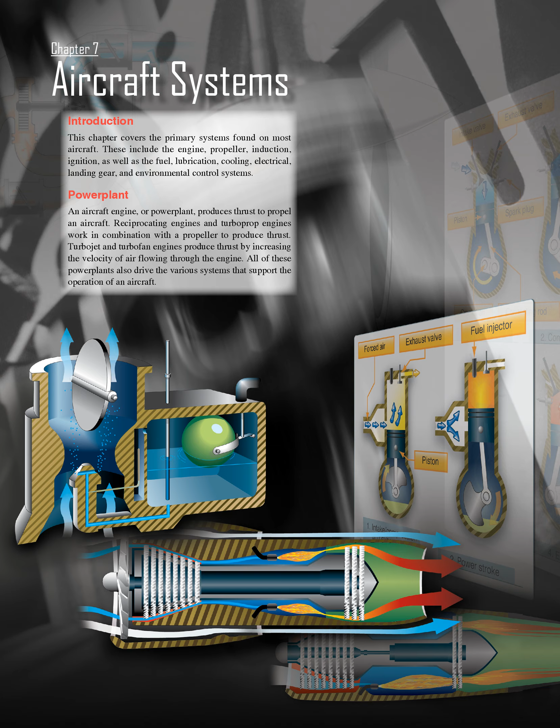Reciprocating engines. Most small aircraft are designed with reciprocating engines. The name is derived from the back and forth, or reciprocating, movement of the pistons that produces the mechanical energy necessary to accomplish work.

Driven by a revitalization of the general aviation industry and advances in both material and engine design, reciprocating engine technology has improved dramatically over the past two decades. The integration of computerized engine management systems has improved fuel efficiency, decreased emissions, and reduced pilot workload.

Reciprocating engines operate on the basic principle of converting chemical energy, fuel, into mechanical energy. This conversion occurs within the cylinders of the engine through the process of combustion. The two primary reciprocating engine designs are the spark ignition and the compression ignition.

The spark ignition reciprocating engine has served as the power plant of choice for many years. In an effort to reduce operating costs, simplify design, and improve reliability, several engine manufacturers are turning to compression ignition as a viable alternative. Often referred to as jet fuel piston engines, compression ignition engines have the added advantage of utilizing readily available and lower cost diesel or jet fuel.

The main mechanical components of the spark ignition and the compression ignition engine are essentially the same. Both use cylindrical combustion chambers and pistons that travel the length of the cylinders to convert linear motion into the rotary motion of the crankshaft.

The main difference between spark ignition and compression ignition is the process of igniting the fuel. Spark ignition engines use a spark plug to ignite a premixed fuel-air mixture. Fuel-air mixture is the ratio of the weight of fuel to the weight of air in the mixture to be burned.

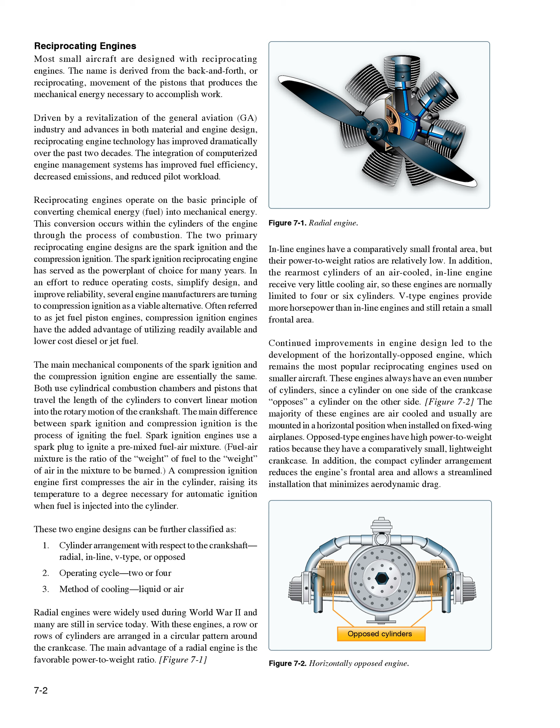Depending on the engine manufacturer, all of these arrangements can be designed to utilize spark or compression ignition and operate on either a two or four-stroke cycle.

In a two-stroke engine, the conversion of chemical energy into mechanical energy occurs over a two-stroke operating cycle. The intake, compression, power, and exhaust processes occur in only two strokes of the piston rather than the more common four strokes. Because a two-stroke engine has a power stroke upon each revolution of the crankshaft, it typically has a higher power-to-weight ratio than a comparable four-stroke engine.

Due to the inherent inefficiency and disproportionate emissions of the earliest designs, use of the two-stroke engine has been limited in aviation. Recent advances in material and engine design have reduced many of the negative characteristics associated with two-stroke engines. Modern two-stroke engines often use conventional oil sumps, oil pumps, and full-pressure-fed lubrication systems.

The use of direct fuel injection and pressurized air, characteristic of advanced compression ignition engines, make two-stroke compression ignition engines a viable alternative to the more common four-stroke spark ignition designs. Spark ignition four-stroke engines remain the most common design used in GA today.

The main parts of a spark ignition reciprocating engine include the cylinders, crankcase, and accessory housing. The intake/exhaust valves, spark plugs, and pistons are located in the cylinders. The crankshaft and connecting rods are located in the crankcase. The magnetos are normally located on the engine accessory housing.

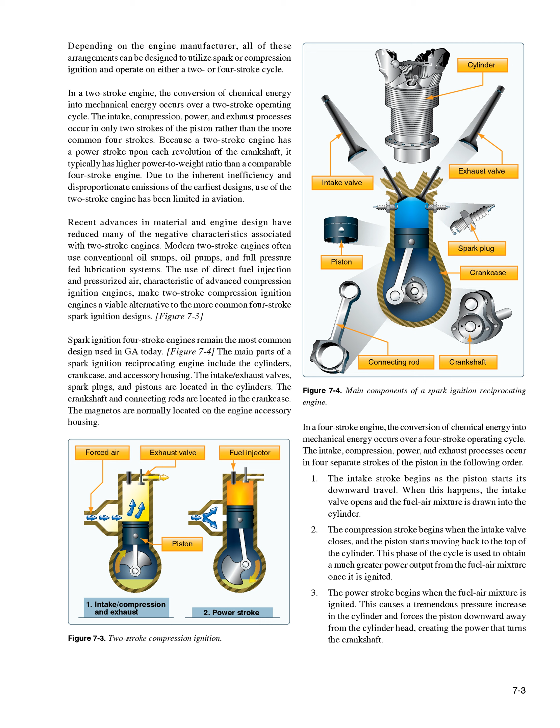Fourth, the exhaust stroke is used to purge the cylinder of burned gases. It begins when the exhaust valve opens, and the piston starts to move toward the cylinder head once again.

Even when the engine is operated at a fairly low speed, the four-stroke cycle takes place several hundred times each minute. In a four-cylinder engine, each cylinder operates on a different stroke. Continuous rotation of a crankshaft is maintained by the precise timing of the power strokes in each cylinder.

Continuous operation of the engine depends on the simultaneous function of auxiliary systems, including the induction, ignition, fuel, oil, cooling, and exhaust systems. The latest advance in aircraft reciprocating engines was pioneered in the mid-1960s by Frank Thielert, who looked to the automotive industry for answers on how to integrate diesel technology into an aircraft engine.

The advantage of a diesel-fueled reciprocating engine lies in the physical similarity of diesel and kerosene. Aircraft equipped with a diesel piston engine run on standard aviation kerosene, which provides more independence, higher reliability, lower consumption, and operational cost savings.

In 1999, Thielert formed Thielert Aircraft Engines, TAE, to design, develop, certify, and manufacture a brand new Jet-A-burning diesel cycle engine, also known as a jet-fueled piston engine, for the GA industry. By March 2001, the first prototype engine became the first certified diesel engine since World War II.

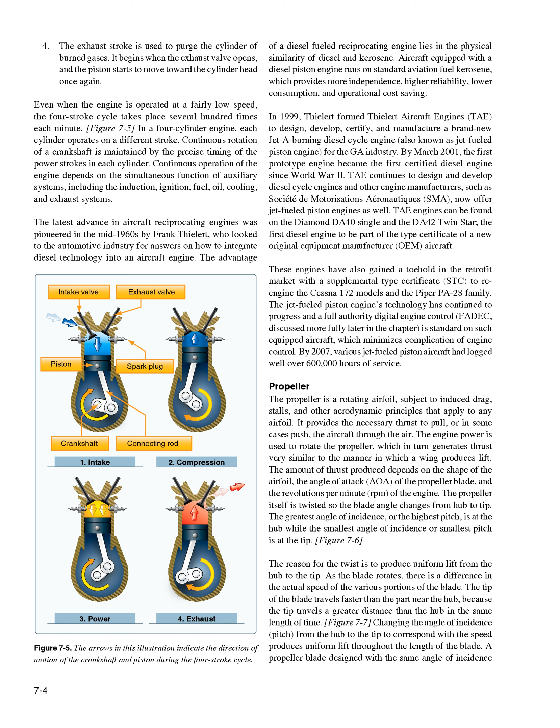A propeller blade designed with the same angle of incidence throughout its entire length would be inefficient, because as airspeed increases in flight, the portion near the hub would have a negative angle of attack while the blade tip would be stalled.

Small aircraft are equipped with either one of two types of propellers: fixed pitch or adjustable pitch. A propeller with fixed blade angles is a fixed pitch propeller. The pitch of this propeller is set by the manufacturer and cannot be changed.

Since a fixed pitch propeller achieves the best efficiency only at a given combination of airspeed and RPM, the pitch setting is ideal for neither cruise nor climb. Thus, the aircraft suffers a bit in each performance category. The fixed pitch propeller is used when low weight, simplicity, and low cost are needed.

There are two types of fixed pitch propellers: climb and cruise. Whether the airplane has a climb or cruise propeller installed depends upon its intended use. The climb propeller has a lower pitch, therefore less drag. Less drag results in higher RPM and more horsepower capability, which increases performance during takeoffs and climbs but decreases performance during cruising flight.

The cruise propeller has a higher pitch, therefore more drag. More drag results in lower RPM and less horsepower capability, which decreases performance during takeoffs and climbs but increases efficiency during cruising flight. The propeller is usually mounted on a shaft, which may be an extension of the engine crankshaft.

In this case, the RPM of the propeller would be the same as the crankshaft RPM. On some engines, the propeller is mounted on a shaft geared to the engine crankshaft. In this type, the RPM of the propeller is different than that of the engine.

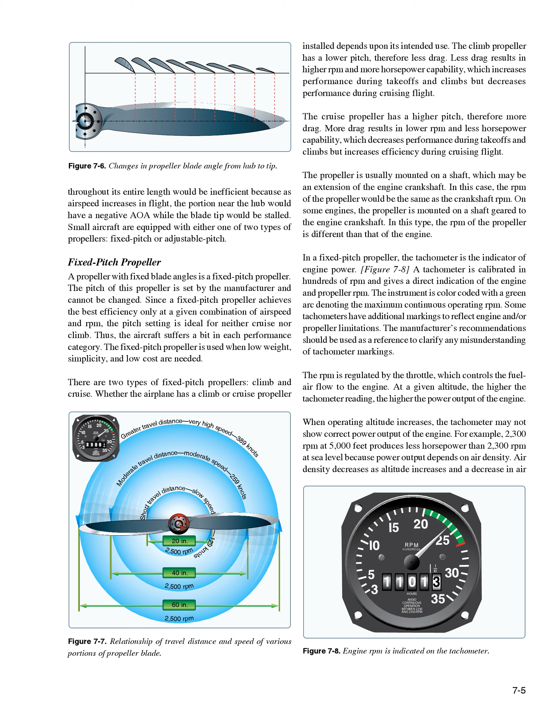When operating altitude increases, the tachometer may not show correct power output of the engine. For example, 2,300 revolutions per minute at 5,000 feet produces less horsepower than 2,300 revolutions per minute at sea level, because power output depends on air density. Air density decreases as altitude increases, and a decrease in air density, or higher density altitude, decreases the power output of the engine.

As altitude changes, the position of the throttle must be changed to maintain the same RPM. As altitude is increased, the throttle must be opened further to indicate the same RPM as at a lower altitude.

Adjustable pitch propeller. The adjustable pitch propeller was the forerunner of the constant speed propeller. It is a propeller with blades whose pitch can be adjusted on the ground with the engine not running, but which cannot be adjusted in flight. It is also referred to as a ground adjustable propeller.

By the 1930s, pioneer aviation inventors were laying the groundwork for automatic pitch change mechanisms, which is why the term sometimes refers to modern constant-speed propellers that are adjustable in flight. The first adjustable pitch propeller systems provided only two pitch settings, low and high. Today, most adjustable pitch propeller systems are capable of a range of pitch settings.

A constant-speed propeller is a controllable pitch propeller whose pitch is automatically varied in flight by a governor maintaining constant RPM despite varying air loads. It is the most common type of adjustable pitch propeller.

The main advantage of a constant-speed propeller is that it converts a high percentage of brake horsepower (bhp) into thrust horsepower (thp) over a wide range of RPM and airspeed combinations. A constant-speed propeller is more efficient than other propellers because it allows selection of the most efficient engine RPM for the given conditions.

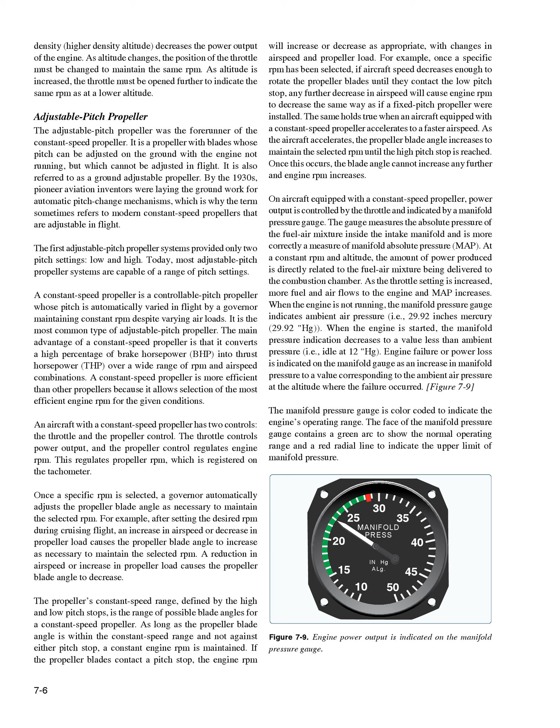For any given RPM, there is a manifold pressure that should not be exceeded. If manifold pressure is excessive for a given RPM, the pressure within the cylinders could be exceeded, placing undue stress on the cylinders. If repeated too frequently, this stress can weaken the cylinder components and eventually cause engine failure.

A pilot can avoid conditions that overstress the cylinders by being constantly aware of the RPM, especially when increasing the manifold pressure. Consult the manufacturer's recommendations for power settings of a particular engine to maintain the proper relationship between manifold pressure and RPM. When both manifold pressure and RPM need to be changed, avoid engine overstress by making power adjustments in the proper order.

When power settings are being decreased, reduce manifold pressure before reducing RPM. If RPM is reduced before manifold pressure, it automatically increases, possibly exceeding the manufacturer's tolerances. When power settings are being increased, reverse the order: increase RPM first, then manifold pressure.

To prevent damage to radial engines, minimize operating time at maximum RPM and manifold pressure, and avoid operation at maximum RPM and low manifold pressure. The engine and/or airframe manufacturer's recommendations should be followed to prevent severe wear, fatigue, and damage to high-performance reciprocating engines.

Propeller overspeed in piston engine aircraft. On March 17, 2010, the Federal Aviation Administration, FAA, issued Special Airworthiness Information Bulletin SAIB CE-10-21.

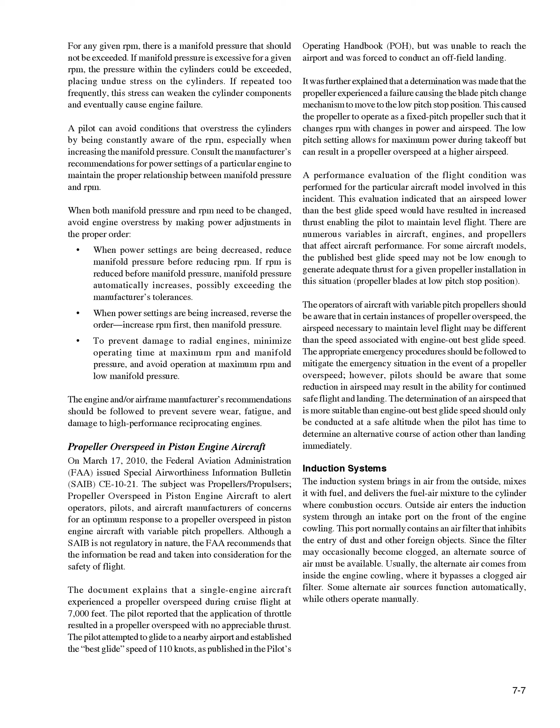Two types of induction systems are commonly used in small aircraft engines. First, the carburetor system mixes the fuel and air in the carburetor before this mixture enters the intake manifold. Second, the fuel injection system mixes the fuel and air immediately before entry into each cylinder, or injects fuel directly into each cylinder. Carburetor systems.

Aircraft carburetors are separated into two categories: float-type carburetors and pressure-type carburetors. Float-type carburetors, complete with idling, accelerating, mixture control, idle cutoff, and power enrichment systems, are the most common of the two carburetor types. Pressure-type carburetors are usually not found on small aircraft.

The basic difference between a float-type and a pressure-type carburetor is the delivery of fuel. The pressure-type carburetor delivers fuel under pressure by a fuel pump.

In the operation of the float-type carburetor system, the outside air first flows through an air filter, usually located at an air intake in the front part of the engine cowling. This filtered air flows into the carburetor and through a venturi, a narrow throat in the carburetor. When the air flows through the venturi, a low pressure area is created that forces the fuel to flow through a main fuel jet located at the throat.

The fuel then flows into the airstream where it is mixed with the flowing air. The fuel-air mixture is then drawn through the intake manifold and into the combustion chambers where it is ignited. The float-type carburetor acquires its name from a float that rests on fuel within the float chamber.

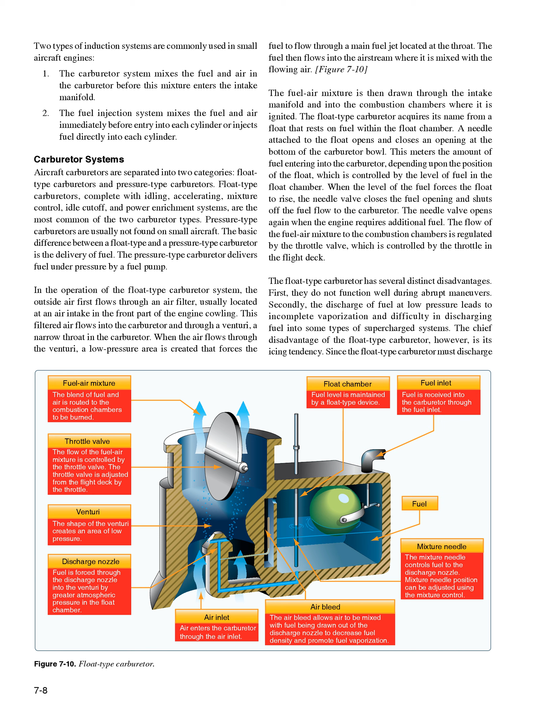The chief disadvantage of the float-type carburetor, however, is its icing tendency. Since the float-type carburetor must discharge fuel at a point of low pressure, the discharge nozzle must be located at the venturi throat, and the throttle valve must be on the engine side of the discharge nozzle. This means that the drop in temperature due to fuel vaporization takes place within the venturi. As a result, ice readily forms in the venturi and on the throttle valve.

A pressure-type carburetor discharges fuel into the airstream at a pressure well above atmospheric pressure. This results in better vaporization and permits the discharge of fuel into the airstream on the engine side of the throttle valve. With the discharge nozzle in this position, fuel vaporization takes place after the air has passed through the throttle valve, at a point where the drop in temperature is offset by heat from the engine. Thus, the danger of fuel vaporization icing is practically eliminated.

The effects of rapid maneuvers and rough air on the pressure-type carburetors are negligible, since their fuel chambers remain filled under all operating conditions.

Mixture control carburetors are normally calibrated at sea level air pressure, where the correct fuel-air mixture ratio is established with the mixture control set in the full rich position. However, as altitude increases, the density of air entering the carburetor decreases, while the density of the fuel remains the same. This creates a progressively richer mixture that can result in engine roughness and an appreciable loss of power.

The roughness normally is due to spark plug fouling from excessive carbon buildup on the plugs. Carbon buildup occurs because the rich mixture lowers the temperature inside the cylinder, inhibiting complete combustion of the fuel. This condition may occur during the run-up prior to takeoff at high elevation airports, and during climbs or cruise flight at high altitudes. To maintain the correct fuel-air mixture, the mixture must be leaned using the mixture control.

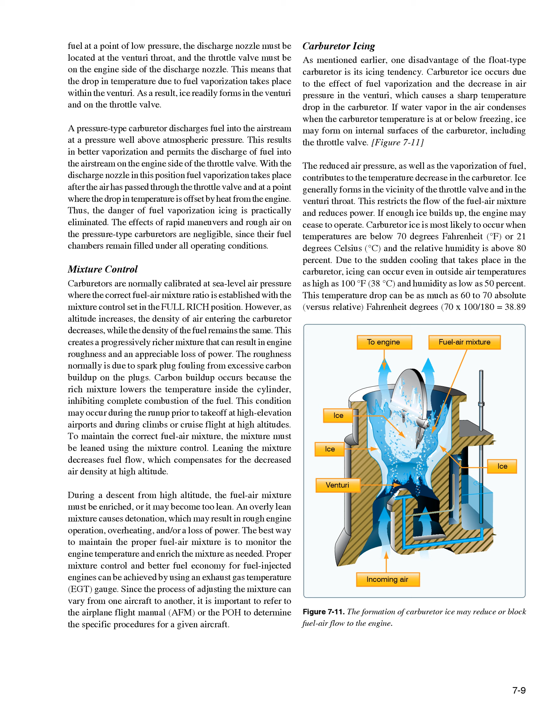This temperature drop can be as much as 60 to 70 absolute, versus relative, Fahrenheit degrees. Remember, there are 180 Fahrenheit degrees from freezing to boiling versus 100 degrees for the Celsius scale. Therefore, an outside air temperature of 100 F, 38 C, with a temperature drop of an absolute 70 F degrees, 38.89 Celsius degrees, results in an air temperature in the carburetor of 30 F, minus 1 C.

Figure 7.12: the first indication of carburetor icing in an aircraft with a fixed pitch propeller is a decrease in engine RPM, which may be followed by engine roughness. In an aircraft with a constant speed propeller, carburetor icing is usually indicated by a decrease in manifold pressure, but no reduction in RPM. Propeller pitch is automatically adjusted to compensate for loss of power. Thus, a constant RPM is maintained.

Although carburetor ice can occur during any phase of flight, it is particularly dangerous when using reduced power during a descent. Under certain conditions, carburetor ice could build unnoticed until power is added. To combat the effects of carburetor ice, engines with float-type carburetors employ a carburetor heat system.

Carburetor heat is an anti-icing system that preheats the air before it reaches the carburetor, and is intended to keep the fuel-air mixture above freezing to prevent the formation of carburetor ice. Carburetor heat can be used to melt ice that has already formed in the carburetor if the accumulation is not too great, but using carburetor heat as a preventative measure is the better option.

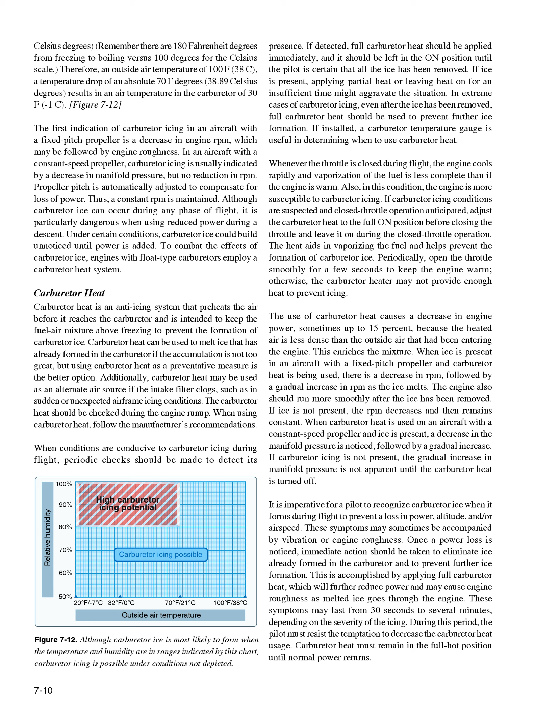Since the use of carburetor heat tends to reduce the output of the engine and to increase the operating temperature, carburetor heat should not be used when full power is required, as during takeoff, or during normal engine operation, except to check for the presence of, or to remove, carburetor ice.

Carburetor air temperature gauge. Some aircraft are equipped with a carburetor air temperature gauge, which is useful in detecting potential icing conditions. Usually, the face of the gauge is calibrated in degrees Celsius with a yellow arc indicating the carburetor air temperatures where icing may occur. This yellow arc typically ranges between -15 degrees Celsius and +5 degrees Celsius, 5 degrees Fahrenheit and 41 degrees Fahrenheit.

If the air temperature and moisture content of the air are such that carburetor icing is improbable, the engine can be operated with the indicator in the yellow range with no adverse effects.

If the atmospheric conditions are conducive to carburetor icing, the indicator must be kept outside the yellow arc by application of carburetor heat. Certain carburetor air temperature gauges have a red radial that indicates the maximum permissible carburetor inlet air temperature recommended by the engine manufacturer. If present, a green arc indicates the normal operating range.

Outside air temperature gauge: most aircraft are also equipped with an outside air temperature (OAT) gauge calibrated in both degrees Celsius and Fahrenheit. It provides the outside or ambient air temperature for calculating true airspeed and is useful in detecting potential icing conditions.

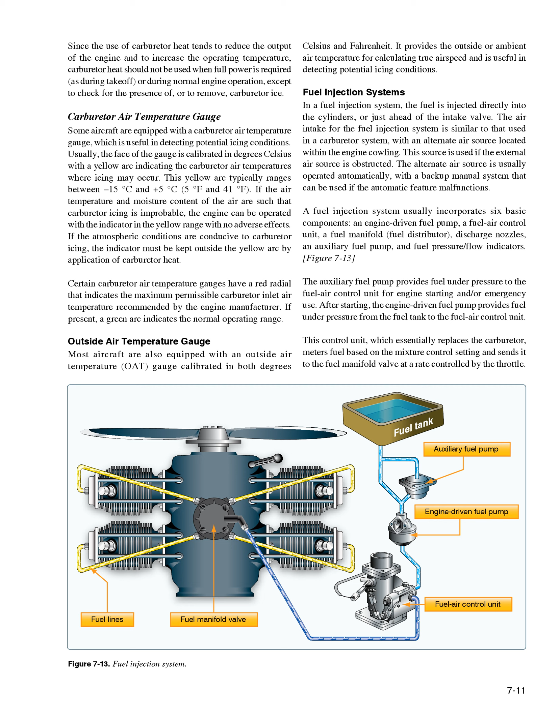It meters fuel based on the mixture control setting and sends it to the fuel manifold valve at a rate controlled by the throttle. After reaching the fuel manifold valve, the fuel is distributed to the individual fuel discharge nozzles. The discharge nozzles, located in each cylinder head, inject the fuel-air mixture directly into each cylinder intake port.

A fuel injection system is considered to be less susceptible to icing than a carburetor system, but impact icing on the air intake is a possibility in either system. Impact icing occurs when ice forms on the exterior of the aircraft and blocks openings, such as the air intake for the injection system. The following are advantages of using fuel injection: reduction in evaporative icing, better fuel flow, faster

throttle response, precise control of mixture, better fuel distribution, easier cold weather starts. The following are disadvantages of using fuel injection: difficulty in starting a hot engine, vapor locks during ground operations on hot days, and problems associated with restarting an engine that quits because of fuel starvation.

Superchargers and turbo superchargers increase an engine's horsepower. Manufacturers have developed forced induction systems called supercharger and turbo supercharger systems. They both compress the intake air to increase its density. The key difference lies in the power supply: a supercharger relies on an engine-driven air pump or compressor, while a turbocharger gets its power from the exhaust stream that runs through a turbine, which in turn spins the compressor.

Aircraft with these systems have a manifold pressure gauge, which displays manifold pressure within the engine's intake manifold. On a standard day at sea level with the engine shut down, the manifold pressure gauge indicates the ambient absolute air pressure of 29.92 inches Hg. Because atmospheric pressure decreases approximately 1 inch Hg per 1,000 feet of altitude increase, the manifold pressure gauge indicates approximately 24.92 inches Hg at an airport that is 5,000 feet above sea level with standard day conditions.

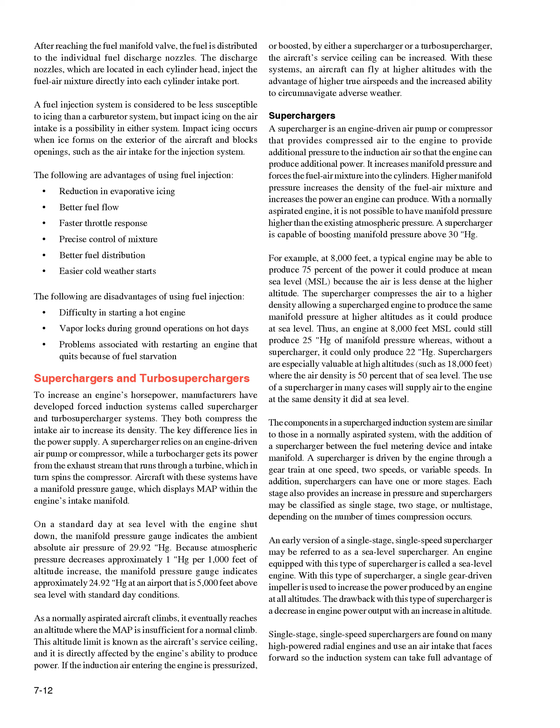Single-stage, single-speed superchargers are found on many high-powered radial engines and use an air intake that faces forward so the induction system can take full advantage of the ram air.

Intake air passes through ducts to a carburetor, where fuel is metered in proportion to the airflow. The fuel-air charge is then ducted to the supercharger, or blower impeller, which accelerates the fuel-air mixture outward. Once accelerated, the fuel-air mixture passes through a diffuser, where air velocity is traded for pressure energy. After compression, the resulting high-pressure fuel-air mixture is directed to the cylinders.

Some of the large radial engines developed during World War II have a single-stage, two-speed supercharger. With this type of supercharger, a single impeller may be operated at 2 speeds. The low impeller speed is often referred to as the low blower setting, while the high impeller speed is called the high blower setting. On engines equipped with a 2-speed supercharger, a lever or switch in the flight deck activates an oil-operated clutch that switches from one speed to the other.

Under normal operations, takeoff is made with the supercharger in the low blower position. In this mode, the engine performs as a ground-boosted engine, and the power output decreases as the aircraft gains altitude. However, once the aircraft reaches a specified altitude, a power reduction is made, and the supercharger control is switched to the high blower position. The throttle is then reset to the desired manifold pressure. An engine equipped with this type of supercharger is called an altitude engine.

Figure 7.14, turbo superchargers. The most efficient method of increasing horsepower in an engine is by using a turbo supercharger or turbocharger. Installed on an engine, this booster uses the engine's exhaust gases to drive an air compressor to increase the pressure of the air going into the engine through the carburetor or fuel injection system to boost power at higher altitude. The major disadvantage of the gear-driven supercharger—use of a large amount of the engine's power output for the amount of power increase produced—is avoided with a turbocharger because turbochargers are powered by an engine's exhaust gases.

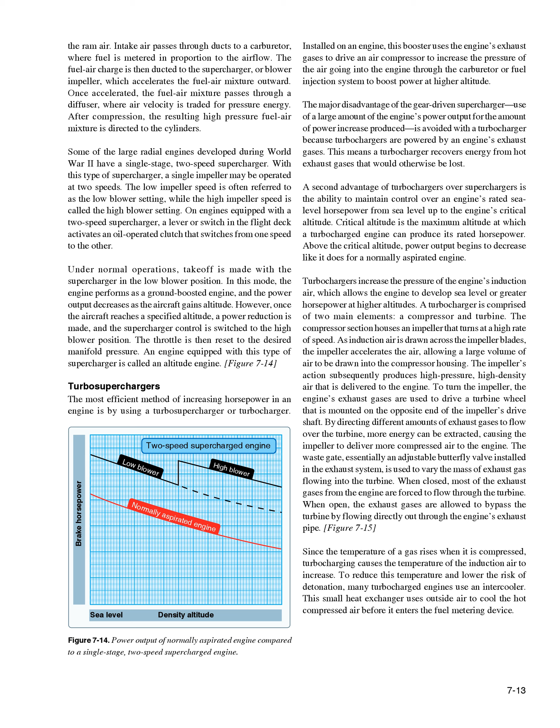This small heat exchanger uses outside air to cool the hot compressed air before it enters the fuel metering device.

System operation: on most modern turbocharged engines, the position of the wastegate is governed by a pressure-sensing control mechanism coupled to an actuator. Engine oil directed into or away from this actuator moves the wastegate position.

On these systems, the actuator is automatically positioned to produce the desired manifold pressure simply by changing the position of the throttle control. Other turbocharging system designs use a separate manual control to position the wastegate.

With manual control, the manifold pressure gauge must be closely monitored to determine when the desired manifold pressure has been achieved. Manual systems are often found on aircraft that have been modified with aftermarket turbocharging systems.

These systems require special operating considerations. For example, if the wastegate is left closed after descending from a high altitude, it is possible to produce a manifold pressure that exceeds the engine's limitations.

This condition, called an overboost, may produce severe detonation because of the leaning effect resulting from increased air density during descent. Although an automatic wastegate system is less likely to experience an overboost condition, it can still occur.

If takeoff power is applied while the engine oil temperature is below its normal operating range, the cold oil may not flow out of the wastegate actuator quickly enough to prevent an overboost. To help prevent overboosting, advance the throttle cautiously to prevent exceeding the maximum manifold pressure limits.

A pilot flying an aircraft with a turbocharger should be aware of system limitations. For example, a turbocharger turbine and impeller can operate at rotational speeds in excess of 80,000 revolutions per minute while at extremely high temperatures.

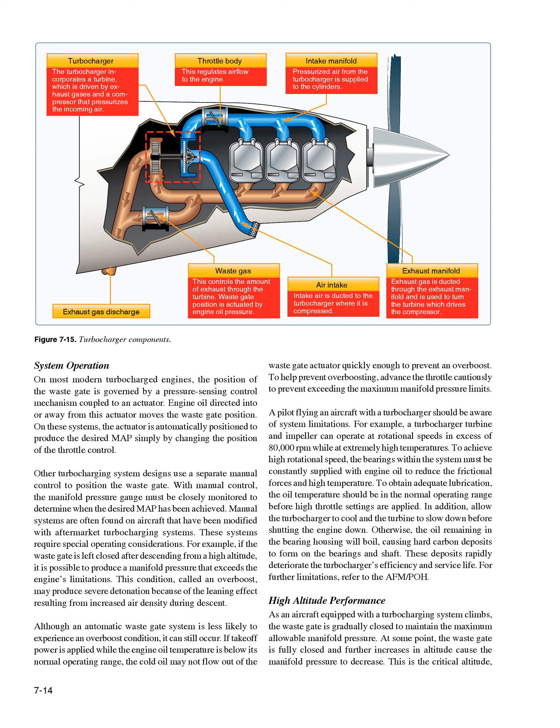The critical altitude is established by the aircraft or engine manufacturer. When evaluating the performance of the turbocharging system, be aware that if the manifold pressure begins decreasing before the specified critical altitude, the engine and turbocharging system should be inspected by a qualified aviation maintenance technician, AMT, to verify that the system is operating properly.

Ignition system: in a spark ignition engine, the ignition system provides a spark that ignites the fuel-air mixture in the cylinders, and is made up of magnetos, spark plugs, high-tension leads, and an ignition switch. A magneto uses a permanent magnet to generate an electrical current completely independent of the aircraft's electrical system.

The magneto generates sufficiently high voltage to jump a spark across the spark plug gap in each cylinder. The system begins to fire when the starter is engaged and the crankshaft begins to turn, and continues to operate whenever the crankshaft is rotating. Most standard certificated aircraft incorporate a dual ignition system with two individual magnetos, separate sets of wires, and spark plugs to increase reliability of the ignition system. Each magneto operates independently to fire one of the two spark plugs in each cylinder.

The firing of two spark plugs improves combustion of the fuel-air mixture and results in a slightly higher power output. If one of the magnetos fails, the other is unaffected, and the engine continues to operate normally, although a slight decrease in engine power can be expected. The same is true if one of the two spark plugs in a cylinder fails.

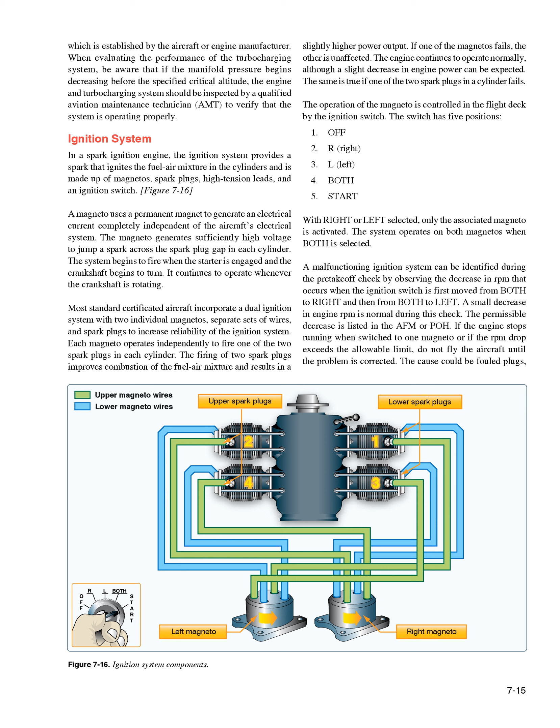If the engine stops running when switched to one magneto, or if the RPM drop exceeds the allowable limit, do not fly the aircraft until the problem is corrected. The cause could be fouled plugs, broken or shorted wires between the magneto and the plugs, or improperly timed firing of the plugs. It should be noted that no drop in RPM is not normal, and in that instance, the aircraft should not be flown. Following engine shutdown, turn the ignition switch to the off position.

Even with the battery and master switches off, the engine can fire and turn over if the ignition switch is left on and the propeller is moved, because the magneto requires no outside source of electrical power. Be aware of the potential for serious injury in this situation.

Even with the ignition switch in the off position, if the ground wire between the magneto and the ignition switch becomes disconnected or broken, the engine could accidentally start if the propeller is moved with residual fuel in the cylinder. If this occurs, the only way to stop the engine is to move the mixture lever to the idle cutoff position, then have the system checked by a qualified AMT.

Oil systems. The engine oil system performs several important functions: lubrication of the engine's moving parts, cooling of the engine by reducing friction, removing heat from the cylinders, providing a seal between the cylinder walls and pistons, and carrying away contaminants.

Reciprocating engines use either a wet sump or a dry sump oil system. In a wet sump system, the oil is located in a sump that is an integral part of the engine. In a dry sump system, the oil is contained in a separate tank and circulated through the engine by pumps.

Figure 7-17: the main component of a wet sump system is the oil pump, which draws oil from the sump and routes it to the engine. After the oil passes through the engine, it returns to the sump. In some engines, additional lubrication is supplied by the rotating crankshaft, which splashes oil onto portions of the engine.

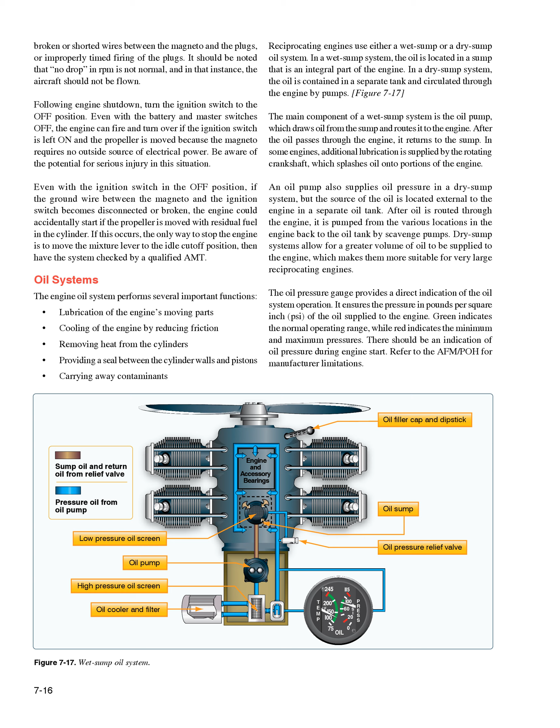The oil temperature gauge measures the temperature of the oil. A green area shows the normal operating range, and the red line indicates the maximum allowable temperature. Unlike oil pressure, changes in oil temperature occur more slowly. This is particularly noticeable after starting a cold engine, when it may take several minutes or longer for the gauge to show any increase in oil temperature.

Check oil temperature periodically during flight, especially when operating in high or low ambient air temperature. High oil temperature indications may signal a plugged oil line, a low oil quantity, a blocked oil cooler, or a defective temperature gauge. Low oil temperature indications may signal improper oil viscosity during cold weather operations. The oil filler cap and dipstick, for measuring the oil quantity, are usually accessible through a panel in the engine cowling.

If the quantity does not meet the manufacturer's recommended operating levels, oil should be added. The AFM/POH or placards near the access panel provide information about the correct oil type and weight, as well as the minimum and maximum oil quantity.

Engine cooling systems. The burning fuel within the cylinders produces intense heat, most of which is expelled through the exhaust system. Much of the remaining heat, however, must be removed, or at least dissipated, to prevent the engine from overheating. Otherwise, the extremely high engine temperatures can lead to loss of power, excessive oil consumption, detonation, and serious engine damage.

While the oil system is vital to the internal cooling of the engine, an additional method of cooling is necessary for the engine's external surface. Most small aircraft are air-cooled, although some are liquid-cooled. Air cooling is accomplished by air flowing into the engine compartment through openings in front of the engine cowling. Baffles route this air over fins attached to the engine cylinders and other parts of the engine, where the air absorbs the engine heat. Expulsion of the hot air takes place through one or more openings in the lower, aft portion of the engine cowling.

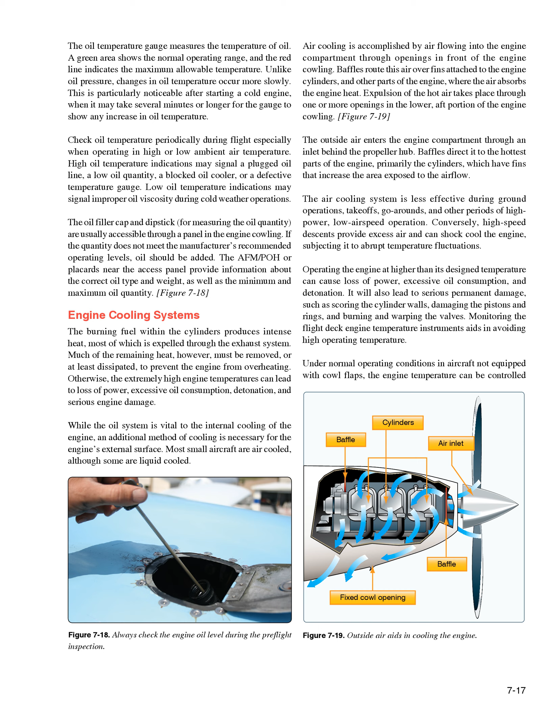Monitoring the flight deck engine temperature instruments aids in avoiding high operating temperature. Under normal operating conditions in aircraft not equipped with cowl flaps, the engine temperature can be controlled by changing the airspeed or the power output of the engine. High engine temperatures can be decreased by increasing the airspeed and/or reducing the power.

The oil temperature gauge gives an indirect and delayed indication of rising engine temperature, but can be used for determining engine temperature if this is the only means available. Most aircraft are equipped with a cylinder head temperature gauge that indicates a direct and immediate cylinder temperature change. This instrument is calibrated in degrees Celsius or Fahrenheit and is usually color-coded with a green arc to indicate the normal operating range. A red line on the instrument indicates maximum allowable cylinder head temperature.

To avoid excessive cylinder head temperatures, increase airspeed, enrich the fuel-air mixture, and/or reduce power. Any of these procedures help to reduce the engine temperature. On aircraft equipped with cowl flaps, use the cowl flap positions to control the temperature.

Cowl flaps are hinged covers that fit over the opening through which the hot air is expelled. If the engine temperature is low, the cowl flaps can be closed, thereby restricting the flow of expelled hot air and increasing engine temperature. If the engine temperature is high, the cowl flaps can be opened to permit a greater flow of air through the system, thereby decreasing the engine temperature.

Exhaust systems. Engine exhaust systems vent the burned combustion gases overboard, provide heat for the cabin, and defrost the windscreen. An exhaust system has exhaust piping attached to the cylinders, as well as a muffler and a muffler shroud. The exhaust gases are pushed out of the cylinder through the exhaust valve and then through the exhaust pipe system to the atmosphere.

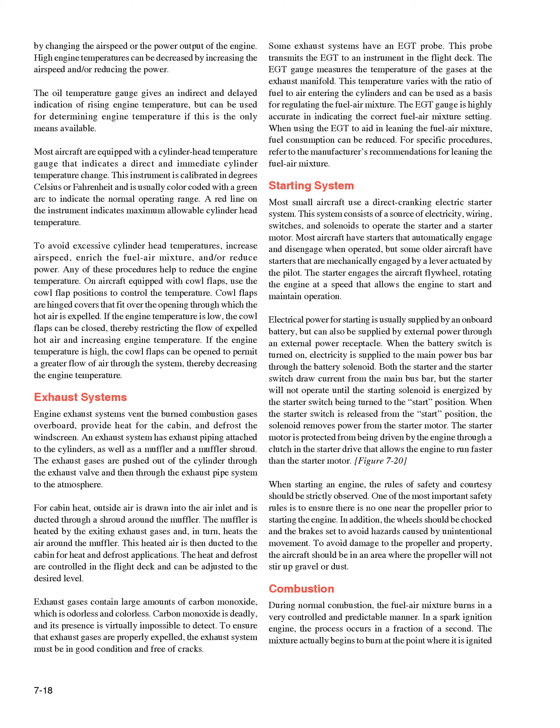The mixture actually begins to burn at the point where it is ignited by the spark plugs. It then burns away from the plugs until it is completely consumed.

This type of combustion causes a smooth buildup of temperature and pressure and ensures that the expanding gases deliver the maximum force to the piston at exactly the right time in the power stroke.

Figure 7-21. Detonation is an uncontrolled, explosive ignition of the fuel-air mixture within the cylinder's combustion chamber. It causes excessive temperatures and pressures which, if not corrected, can quickly lead to failure of the piston, cylinder, or valves. In less severe cases, detonation causes engine overheating, roughness, or loss of power.

Detonation is characterized by high cylinder head temperatures and is most likely to occur when operating at high power settings.

Common operational causes of detonation are use of a lower fuel grade than that specified by the aircraft manufacturer, operation of the engine with extremely high manifold pressures in conjunction with low RPM, operation of the engine at high power settings with an excessively lean mixture, and maintaining extended ground operations or steep climbs in which cylinder cooling is reduced.

Detonation may be avoided by following these basic guidelines during the various phases of ground and flight operations. Ensure that the proper grade of fuel is used. Keep the cowl flaps, if available, in the full open position while on the ground to provide the maximum airflow through the cowling.

Use an enriched fuel mixture, as well as a shallow climb angle, to increase cylinder cooling during takeoff and initial climb. Avoid extended, high-power, steep climbs.

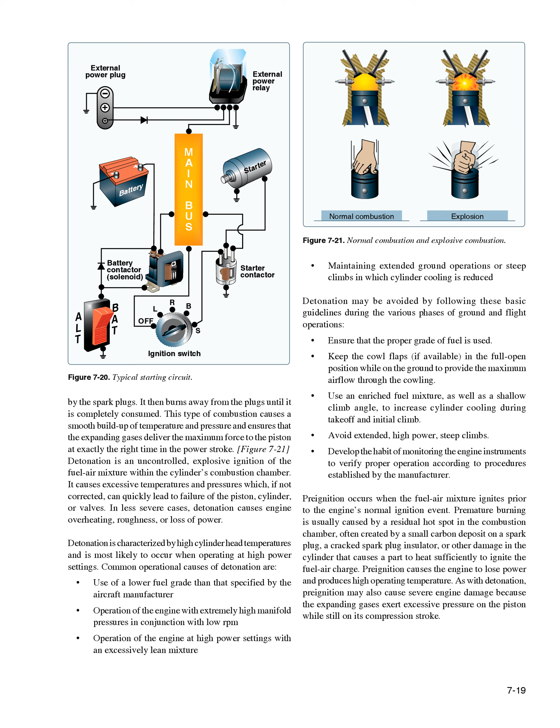Detonation and pre-ignition often occur simultaneously and one may cause the other. Since either condition causes high engine temperature accompanied by a decrease in engine performance, it is often difficult to distinguish between the two. Using the recommended grade of fuel and operating the engine within its proper temperature, pressure, and RPM ranges reduce the chance of detonation or pre-ignition.

Full Authority Digital Engine Control, or FADEC, is a system consisting of a digital computer and ancillary components that control an aircraft's engine and propeller. First used in turbine-powered aircraft, and referred to as Full Authority Digital Electronic Control, these sophisticated control systems are increasingly being used in piston-powered aircraft.

In a spark ignition reciprocating engine, the FADEC uses speed, temperature, and pressure sensors to monitor the status of each cylinder. A digital computer calculates the ideal pulse for each injector and adjusts ignition timing as necessary to achieve optimal performance. In a compression ignition engine, the FADEC operates similarly and performs all of the same functions, excluding those specifically related to the spark ignition process.

FADEC systems eliminate the need for magnetos, carburetor heat, mixture controls, and engine priming. A single throttle lever is characteristic of an aircraft equipped with a FADEC system. The pilot simply positions the throttle lever to a desired detent such as start, idle, cruise power, or max power, and the FADEC system adjusts the engine and propeller automatically for the mode selected. There is no need for the pilot to monitor or control the fuel-air mixture.

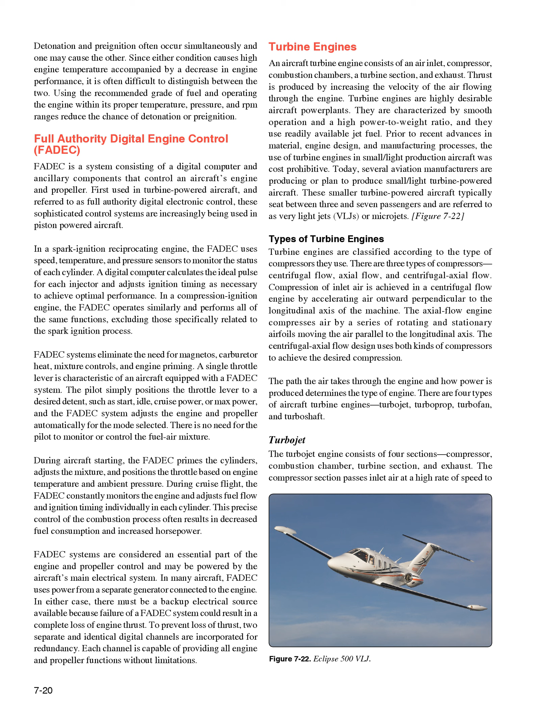The compressor section passes inlet air at a high rate of speed to the combustion chamber. The combustion chamber contains the fuel inlet and igniter for combustion. The expanding air drives a turbine, which is connected by a shaft to the compressor, sustaining engine operation. The accelerated exhaust gases from the engine provide thrust.

This is a basic application of compressing air, igniting the fuel-air mixture, producing power to self-sustain the engine operation, and exhaust for propulsion. Turbojet engines are limited in range and endurance. They are also slow to respond to throttle applications at slow compressor speeds.

Turboprop. A turboprop engine is a turbine engine that drives a propeller through a reduction gear. The exhaust gases drive a power turbine connected by a shaft that drives the reduction gear assembly. Reduction gearing is necessary in turboprop engines because optimum propeller performance is achieved at much slower speeds than the engine's operating RPM. Turboprop engines are a compromise between turbojet engines and reciprocating power plants.

Turboprop engines are most efficient at speeds between 250 and 400 miles per hour and altitudes between 18,000 and 30,000 feet. They also perform well at the slow air speeds required for takeoff and landing and are fuel efficient. The minimum specific fuel consumption of the turboprop engine is normally available in the altitude range of 25,000 feet to the tropopause.

Turbofan. Turbofans were developed to combine some of the best features of the turbojet and the turboprop. Turbofan engines are designed to create additional thrust by diverting a secondary airflow around the combustion chamber. The turbofan bypass air generates increased thrust, cools the engine, and aids in exhaust noise suppression. This provides turbojet-type cruise speed and lower fuel consumption.

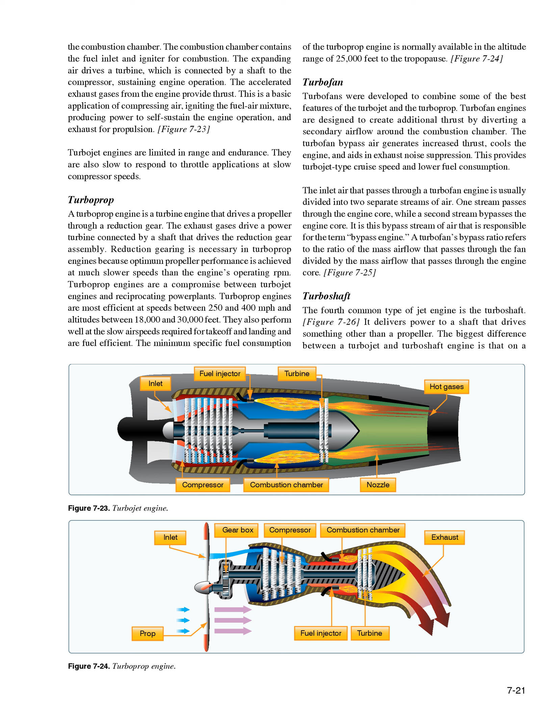Turboshaft. The fourth common type of jet engine is the turboshaft. It delivers power to a shaft that drives something other than a propeller. The biggest difference between a turbojet and turboshaft engine is that on a turboshaft engine, most of the energy produced by the expanding gases is used to drive a turbine rather than produce thrust. Many helicopters use a turboshaft gas turbine engine. In addition, turboshaft engines are widely used as auxiliary power units on large aircraft.

Turbine engine instruments that indicate oil pressure, oil temperature, engine speed, exhaust gas temperature, and fuel flow are common to both turbine and reciprocating engines. However, there are some instruments that are unique to turbine engines. These instruments provide indications of engine pressure ratio, turbine discharge pressure, and torque. In addition, most gas turbine engines have multiple temperature sensing instruments, called thermocouples, which provide pilots with temperature readings in and around the turbine section.

Engine pressure ratio, EPR. An engine pressure ratio gauge is used to indicate the power output of a turbojet/turbofan engine. EPR is the ratio of turbine discharge to compressor inlet pressure. Pressure measurements are recorded by probes installed in the engine inlet and at the exhaust. Once collected, the data is sent to a differential pressure transducer, which is indicated on a flight deck EPR gauge. EPR system design automatically compensates for the effects of airspeed and altitude. Changes in ambient temperature require a correction be applied to EPR indications to provide accurate engine power settings.

Exhaust gas temperature, EGT. A limiting factor in a gas turbine engine is the temperature of the turbine section. The temperature of a turbine section must be monitored closely to prevent overheating the turbine blades and other exhaust section components. One common way of monitoring the temperature of a turbine section is with an EGT gauge. EGT is an engine operating limit used to monitor overall engine operating conditions. Variations of EGT systems bear different names based on the location of the temperature sensors. Common turbine temperature sensing gauges include the turbine inlet temperature, TIT, gauge, turbine outlet temperature, TOT gauge, interstage turbine temperature, ITT gauge, and turbine gas temperature, TGT gauge.

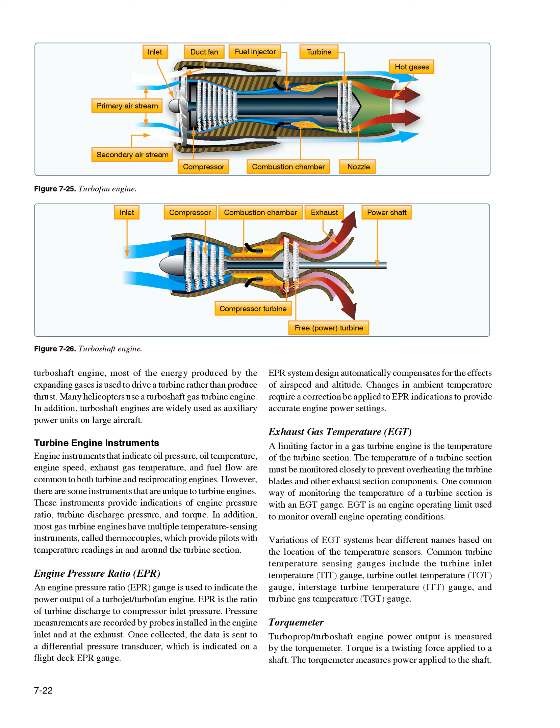Torque meter. Turboprop/turboshaft engine power output is measured by the torque meter. Torque is a twisting force applied to a shaft. The torque meter measures power applied to the shaft. Turboprop and turboshaft engines are designed to produce torque for driving a propeller. Torque meters are calibrated in percentage units, foot-pounds, or psi.

N1 indicator. N1 represents the rotational speed of the low-pressure compressor and is presented on the indicator as a percentage of design RPM. After start, the speed of the low-pressure compressor is governed by the N1 turbine wheel. The N1 turbine wheel is connected to the low-pressure compressor through a concentric shaft.

N2 indicator. N2 represents the rotational speed of the high-pressure compressor and is presented on the indicator as a percentage of design RPM. The high-pressure compressor is governed by the N2 turbine wheel. The N2 turbine wheel is connected to the high-pressure compressor through a concentric shaft.

Turbine Engine Operational Considerations. The great variety of turbine engines makes it impractical to cover specific operational procedures, but there are certain operational considerations common to all turbine engines. They are engine temperature limits, foreign object damage, hot start, compressor stall, and flameout.

Engine temperature limitations. The highest temperature in any turbine engine occurs at the turbine inlet. TIT is therefore usually the limiting factor in turbine engine operation. Thrust variations: turbine engine thrust varies directly with air density.

As air density decreases, so does thrust. Additionally, because air density decreases with an increase in temperature, increased temperatures also result in decreased thrust. While both turbine and reciprocating powered engines are affected to some degree by high relative humidity, turbine engines will experience a negligible loss of thrust, while reciprocating engines experience a significant loss of brake horsepower.

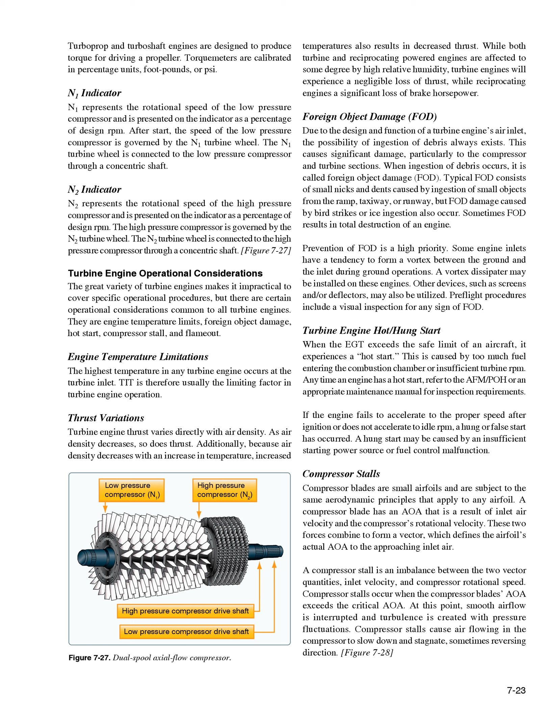Compressor stalls can be transient and intermittent, or steady and severe. Indications of a transient or intermittent stall are usually an intermittent bang as backfire and flow reversal take place. If the stall develops and becomes steady, strong vibration and a loud roar may develop from the continuous flow reversal.

Often, the flight deck gauges do not show a mild or transient stall, but they do indicate a developed stall. Typical instrument indications include fluctuations in RPM and an increase in exhaust gas temperature. Most transient stalls are not harmful to the engine and often correct themselves after one or two pulsations.

The possibility of severe engine damage from a steady-state stall is immediate. Recovery must be accomplished by quickly reducing power, decreasing the aircraft's angle of attack, and increasing airspeed. Although all gas turbine engines are subject to compressor stalls, most models have systems that inhibit them.

One system uses a variable inlet guide vane (VIGV) and variable stator vanes that direct the incoming air into the rotor blades at an appropriate angle. To prevent air pressure stalls, operate the aircraft within the parameters established by the manufacturer. If a compressor stall does develop, follow the procedures recommended in the AFM/POH.

Flameout. A flameout occurs in the operation of a gas turbine engine in which the fire in the engine unintentionally goes out. If the rich limit of the fuel-air ratio is exceeded in the combustion chamber, the flame will blow out. This condition is often referred to as a rich flameout.

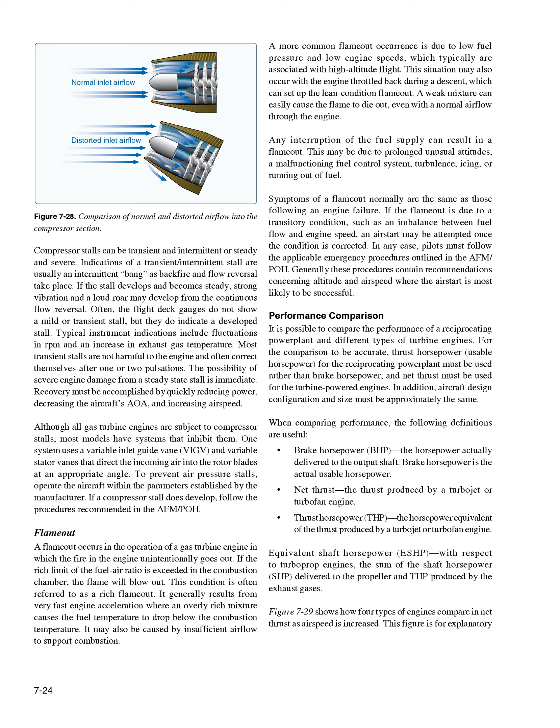Figure 7-29 shows how four types of engines compare in net thrust as airspeed is increased. This figure is for explanatory purposes only and is not for specific models of engines. The four types of engines are: reciprocating power plant, turbine-propeller combination (turboprop), turbine engine incorporating a fan (turbofan), and turbojet (pure jet). By plotting the performance curve for each engine, a comparison can be made of maximum aircraft speed variation with the type of engine used. Since the graph is only a means of comparison, numerical values for net thrust, aircraft speed, and drag are not included.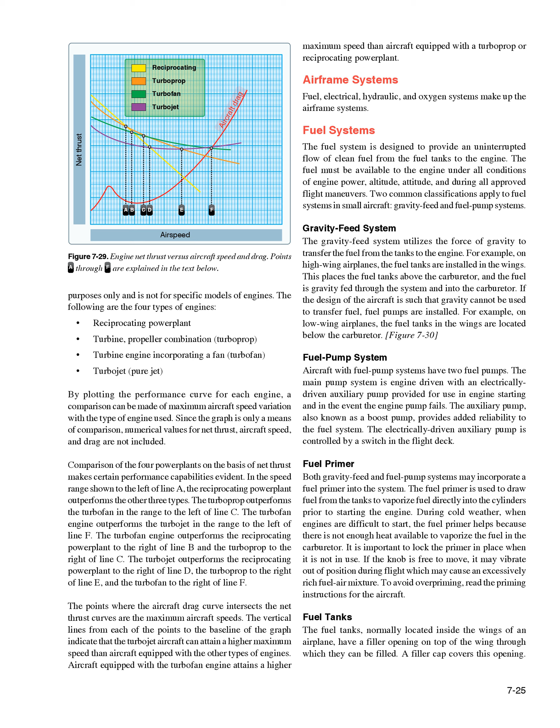The tanks are vented to the outside to maintain atmospheric pressure inside the tank. They may be vented through the filler cap or through a tube extending through the surface of the wing. Fuel tanks also include an overflow drain that may stand alone or be collocated with the fuel tank vent. This allows fuel to expand with increases in temperature without damage to the tank itself. If the tanks have been filled on a hot day, it is not unusual to see fuel coming from the overflow drain.

Fuel gauges. The fuel quantity gauges indicate the amount of fuel measured by a sensing unit in each fuel tank and is displayed in gallons or pounds. Aircraft certification rules require accuracy in fuel gauges only when they read empty. Any reading other than empty should be verified.

Do not depend solely on the accuracy of the fuel quantity gauges. Always visually check the fuel level in each tank during the pre-flight inspection, and then compare it with the corresponding fuel quantity indication. If a fuel pump is installed in the fuel system, a fuel pressure gauge is also included. This gauge indicates the pressure in the fuel lines. The normal operating pressure can be found in the AFM/POH or on the gauge by color coding.

Fuel selectors. The fuel selector valve allows selection of fuel from various tanks. A common type of selector valve contains 4 positions: left, right, both, and off. Selecting the left or right position allows fuel to feed only from the respective tank, while selecting the both position feeds fuel from both tanks. The left or right position may be used to balance the amount of fuel remaining in each wing tank.

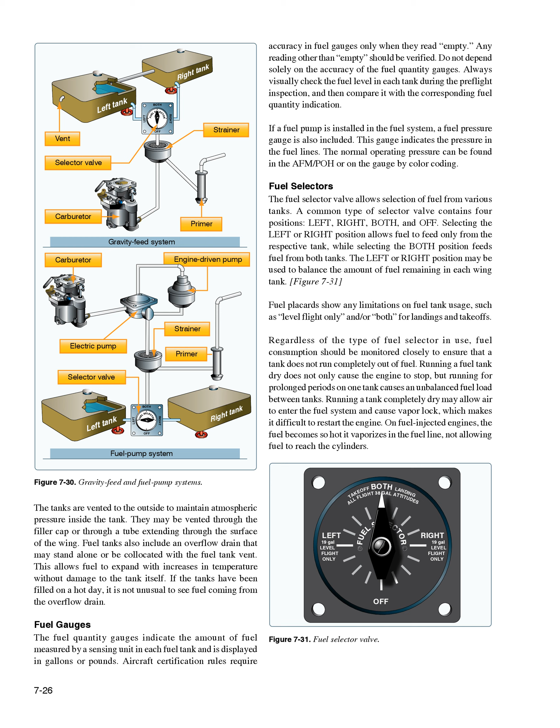Fuel strainers, sumps, and drains. After leaving the fuel tank and before it enters the carburetor, the fuel passes through a strainer that removes any moisture and other sediments in the system. Since these contaminants are heavier than aviation fuel, they settle in a sump at the bottom of the strainer assembly. A sump is a low point in a fuel system and/or fuel tank. The fuel system may contain a sump, a fuel strainer, and fuel tank drains, which may be collocated.

The fuel strainer should be drained before each flight. Fuel samples should be drained and checked visually for water and contaminants. Water in the sump is hazardous because in cold weather the water can freeze and block fuel lines. In warm weather, it can flow into the carburetor and stop the engine. If water is present in the sump, more water in the fuel tanks is probable, and they should be drained until there is no evidence of water. Never take off until all water and contaminants have been removed from the engine fuel system.

Because of the variation in fuel systems, become thoroughly familiar with the systems that apply to the aircraft being flown. Consult the AFM/POH for specific operating procedures. Fuel grades. Aviation gasoline, AVGAS, is identified by an octane or performance number grade, which designates the anti-knock value or knock resistance of the fuel mixture in the engine cylinder.

The higher the grade of gasoline, the more pressure the fuel can withstand without detonating. Lower grades of fuel are used in lower compression engines because these fuels ignite at a lower temperature. Higher grades are used in higher compression engines because they ignite at higher temperatures, but not prematurely. If the proper grade of fuel is not available, use the next higher grade as a substitute. Never use a grade lower than recommended.

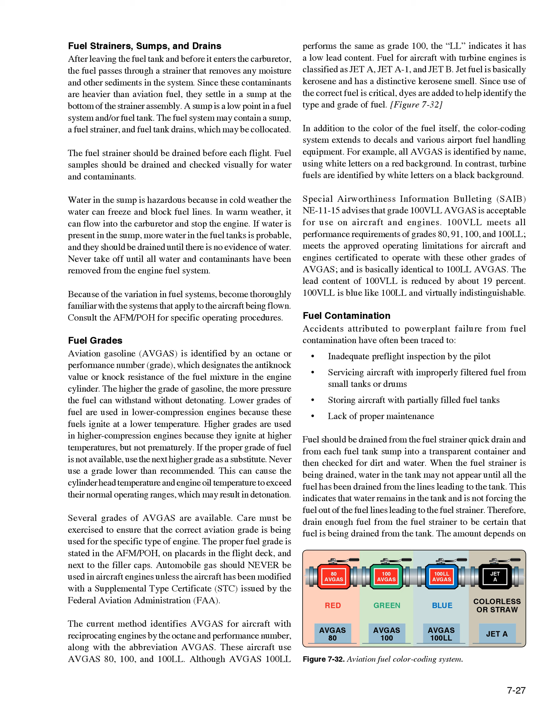When the fuel strainer is being drained, water in the tank may not appear until all the fuel has been drained from the lines leading to the tank. This indicates that water remains in the tank and is not forcing the fuel out of the fuel lines leading to the fuel strainer. Therefore, drain enough fuel from the fuel strainer to be certain that fuel is being drained from the tank. The amount depends on the length of fuel line from the tank to the drain.

If water or other contaminants are found in the first sample, drain further samples until no trace appears. Water may also remain in the fuel tanks after the drainage from the fuel strainer has ceased to show any trace of water. This residual water can be removed only by draining the fuel tank sump drains.

Water is the principal fuel contaminant. Suspended water droplets in the fuel can be identified by a cloudy appearance of the fuel, or by the clear separation of water from the colored fuel, which occurs after the water has settled to the bottom of the tank. As a safety measure, the fuel sumps should be drained before every flight during the pre-flight inspection.

Fuel tanks should be filled after each flight or after the last flight of the day to prevent moisture condensation within the tank. To prevent fuel contamination, avoid refueling from cans and drums. In remote areas or in emergency situations, there may be no alternative to refueling from sources with inadequate anti-contamination systems. While a chamois skin and funnel may be the only possible means of filtering fuel, using them is hazardous.

Remember, the use of a chamois does not always ensure decontaminated fuel. Worn-out chamois do not filter water, neither will a new, clean chamois that is already water wet or damp. Most imitation chamois skins do not filter water.

Fuel system icing. Ice formation in the aircraft fuel system results from the presence of water in the fuel system. This water may be undissolved or dissolved. One condition of undissolved water is entrained water, which consists of minute water particles suspended in the fuel.

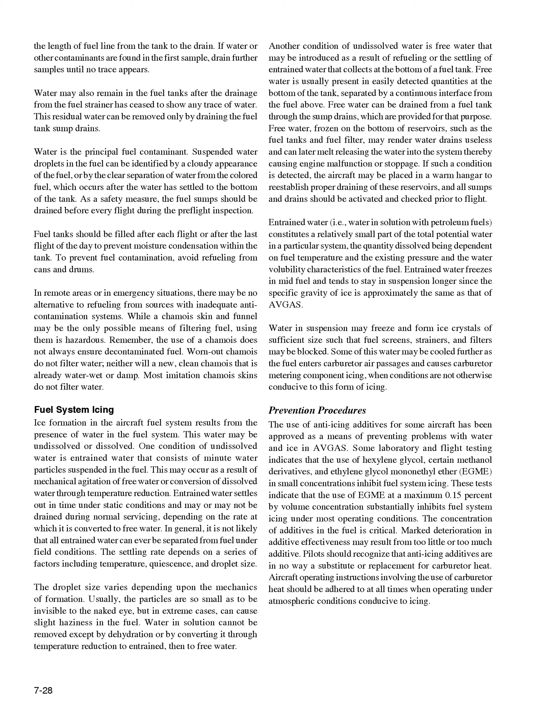Refueling procedures. Static electricity is formed by the friction of air passing over the surfaces of an aircraft in flight and by the flow of fuel through the hose and nozzle during refueling. Nylon, Dacron, or wool clothing is especially prone to accumulate and discharge static electricity from the person to the funnel or nozzle.

To guard against the possibility of static electricity igniting fuel fumes, a ground wire should be attached to the aircraft before the fuel cap is removed from the tank. Because both the aircraft and refueler have different static charges, bonding both components to each other is critical. By bonding both components to each other, the static differential charge is equalized.

The refueling nozzle should be bonded to the aircraft before refueling begins and should remain bonded throughout the refueling process. When a fuel truck is used, it should be grounded prior to the fuel nozzle contacting the aircraft. If fueling from drums or cans is necessary, proper bonding and grounding connections are important.

Drums should be placed near grounding posts, and the following sequence of connections observed: 1. Drum to ground. 2. Ground to aircraft. 3. Drum to aircraft or nozzle to aircraft. before removing the fuel cap. When disconnecting, reverse the order.

The passage of fuel through a chamois increases the charge of static electricity and the danger of sparks. The aircraft must be properly grounded, and the nozzle, chamois filter, and funnel bonded to the aircraft. If a can is used, it should be connected to either the grounding post or the funnel.

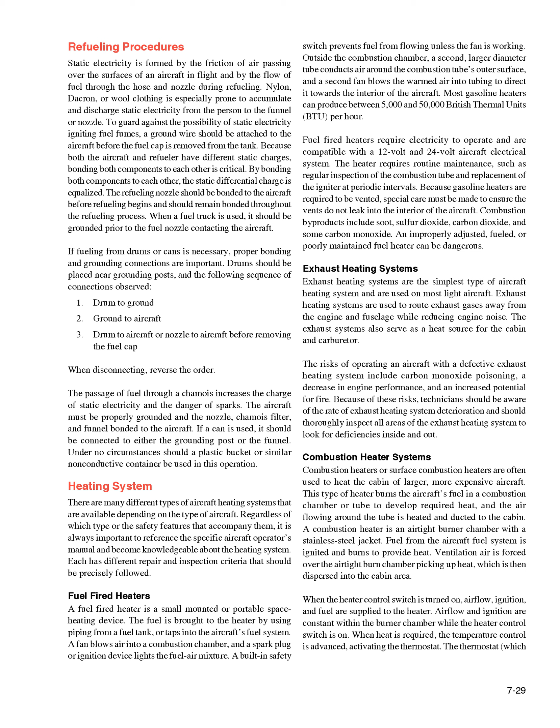When the heater control switch is turned on, airflow, ignition, and fuel are supplied to the heater. Airflow and ignition are constant within the burner chamber while the heater control switch is on. When heat is required, the temperature control is advanced, activating the thermostat. The thermostat, which senses ventilation air temperature, turns on the fuel solenoid, allowing fuel to spray into the burner chamber. Fuel mixes with air inside the chamber and is ignited by the spark plug, producing heat.

The byproduct, carbon monoxide, leaves the aircraft through the heater exhaust pipe. Air flowing over the outside of the burner chamber and inside the jacket of the heater absorbs the heat and carries it through ducts into the cabin. As the thermostat reaches its preset temperature, it turns off the fuel solenoid and stops the flow of fuel into the burner chamber. When ventilation air cools to the point that the thermostat again turns the fuel solenoid on, the burner starts again.

This method of heat is very safe as an overheat switch is provided on all combustion heaters, which is wired into the heater's electrical system to shut off the fuel in the case of malfunction. In the unlikely event that the heater fuel solenoid, located at the heater, remains open or the control switches fail, the remote fuel solenoid and/or fuel pump is shut off by the mechanical overheat switch, stopping all fuel flow to the system. As opposed to the fuel-fired cabin heaters that are used on most single-engine aircraft, it is unlikely for carbon monoxide poisoning to occur in combustion heaters. Combustion heaters have low pressure in the combustion tube that is vented through its exhaust into the airstream.

The ventilation air on the outside of the combustion chamber is of higher pressure than on the inside, and ram air increases the pressure on the outside of the combustion tube. In the event a leak would develop in the combustion chamber, the higher pressure air outside the chamber would travel into the chamber and out the exhaust.

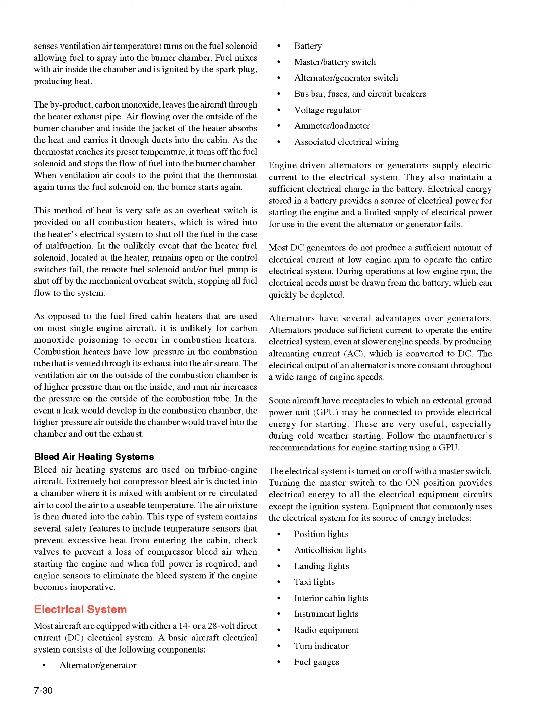electric fuel pump, stall warning system, pitot heat, starting motor. Many aircraft are equipped with a battery switch that controls the electrical power to the aircraft in a manner similar to the master switch. In addition, an alternator switch is installed that permits the pilot to exclude the alternator from the electrical system in the event of alternator failure.

As shown in Figure 7-33, with the alternator half of the switch in the off position, the entire electrical load is placed on the battery. All non-essential electrical equipment should be turned off to conserve battery power. A bus bar is used as a terminal in the aircraft electrical system to connect the main electrical system to the equipment using electricity as a source of power.

This simplifies the wiring. An ammeter is used to monitor the performance of the aircraft electrical system. The ammeter shows if the alternator/generator is producing an adequate supply of electrical power. It also indicates whether or not the battery is receiving an electrical charge.

Ammeters are designed with the zero point in the center of the face and a negative or positive indication on either side. As shown in Figure 7-35, when the pointer of the ammeter is on the plus side, it shows the charging rate of the battery. A minus indication means more current is being drawn from the battery than is being replaced. A full-scale minus deflection indicates a malfunction of the alternator/generator. A full-scale positive deflection indicates a malfunction of the regulator. In either case, consult the AFM/POH for appropriate action to be taken.

Not all aircraft are equipped with an ammeter. Some have a warning light that, when lighted, indicates a discharge in the system or a generator/alternator malfunction. Refer to the AFM/POH for appropriate action to be taken.

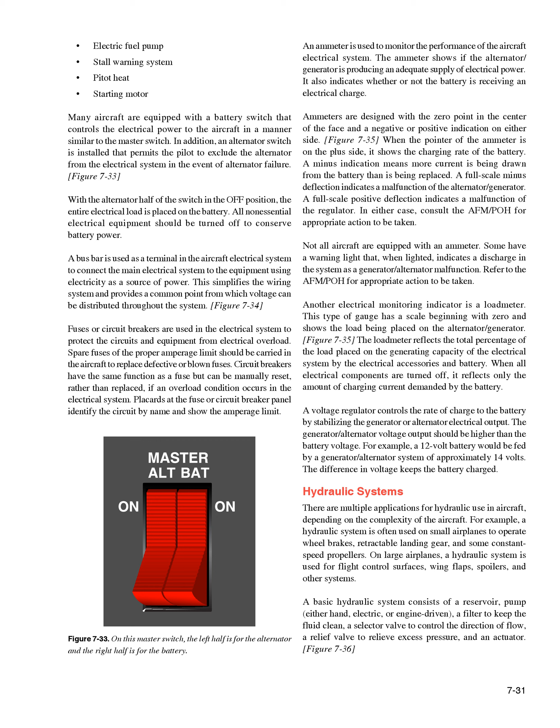The hydraulic fluid is pumped through the system to an actuator or servo. A servo is a cylinder with a piston inside that turns fluid power into work and creates the power needed to move an aircraft system or flight control.

Servos can be either single-acting or double-acting, based on the needs of the system. This means that the fluid can be applied to one or both sides of the servo, depending on the servo type. A single-acting servo provides power in one direction.

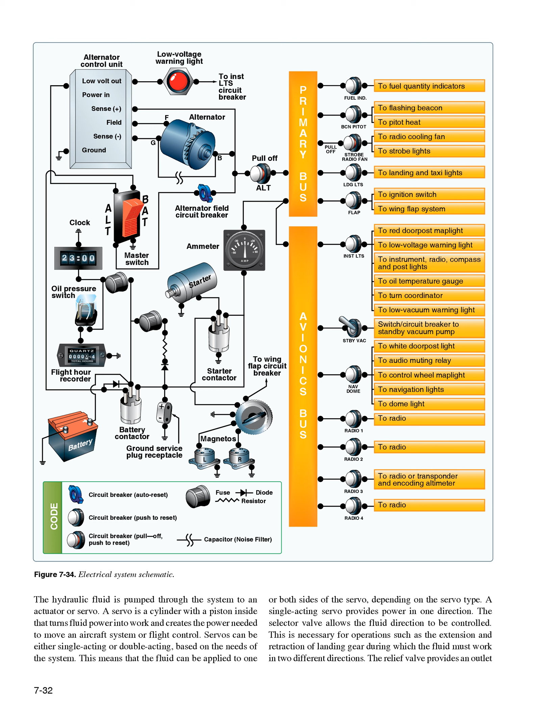The selector valve allows the fluid direction to be controlled. This is necessary for operations such as the extension and retraction of landing gear, during which the fluid must work in two different directions. The relief valve provides an outlet for the system in the event of excessive fluid pressure in the system.

Each system incorporates different components to meet the individual needs of different aircraft. A mineral-based hydraulic fluid is the most widely used type for small aircraft. This type of hydraulic fluid, a kerosene-like petroleum product, has good lubricating properties, as well as additives to inhibit foaming and prevent the formation of corrosion. It is chemically stable, has very little viscosity change with temperature, and is dyed for identification.

Since several types of hydraulic fluids are commonly used, an aircraft must be serviced with the type specified by the manufacturer. Refer to the AFM/POH or the maintenance manual.

Landing gear forms the principal support of an aircraft on the surface. The most common type of landing gear consists of wheels, but aircraft can also be equipped with floats for water operations or skis for landing on snow.

Figure 737, the landing gear on small aircraft consists of three wheels: two main wheels, one located on each side of the fuselage, and a third wheel positioned either at the front or rear of the airplane. Landing gear employing a rear-mounted wheel is called conventional landing gear. Airplanes with conventional landing gear are often referred to as tailwheel airplanes.

When the third wheel is located on the nose, it is called a nose wheel, and the design is referred to as a tricycle gear. A steerable nose wheel or tail wheel permits the airplane to be controlled throughout all operations while on the ground.

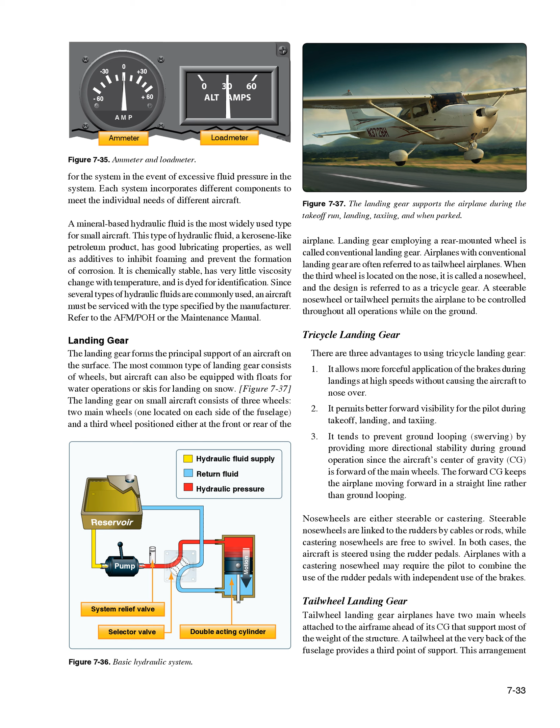Tailwheel landing gear airplanes have two main wheels attached to the airframe ahead of its CG that support most of the weight of the structure. A tail wheel at the very back of the fuselage provides a third point of support. This arrangement allows adequate ground clearance for a larger propeller and is more desirable for operations on unimproved fields.

Figure 738, with the CG located behind the main landing gear, directional control using this type of landing gear is more difficult while on the ground. This is the main disadvantage of the tailwheel landing gear. For example, if the pilot allows the aircraft to swerve while rolling on the ground at a low speed, he or she may not have sufficient rudder control and the CG will attempt to get ahead of the main gear, which may cause the airplane to ground loop.

Diminished forward visibility when the tailwheel is on or near the ground is a second disadvantage of tailwheel landing gear airplanes. Because of these disadvantages, specific training is required to operate tailwheel airplanes.

Fixed and retractable landing gear. Landing gear can also be classified as either fixed or retractable. Fixed landing gear always remains extended and has the advantage of simplicity combined with low maintenance. Retractable landing gear is designed to streamline the airplane by allowing the landing gear to be stowed inside the structure during cruising flight. Figure 739, brakes.

Airplane brakes are located on the main wheels and are applied by either a hand control or by foot pedals, toe or heel. Foot pedals operate independently and allow for differential braking. During ground operations, differential braking can supplement nosewheel/tailwheel steering.

Pressurized aircraft. Aircraft are flown at high altitudes for two reasons. First, an aircraft flown at high altitude consumes less fuel for a given airspeed than it does for the same speed at a lower altitude because the aircraft is more efficient at a high altitude.

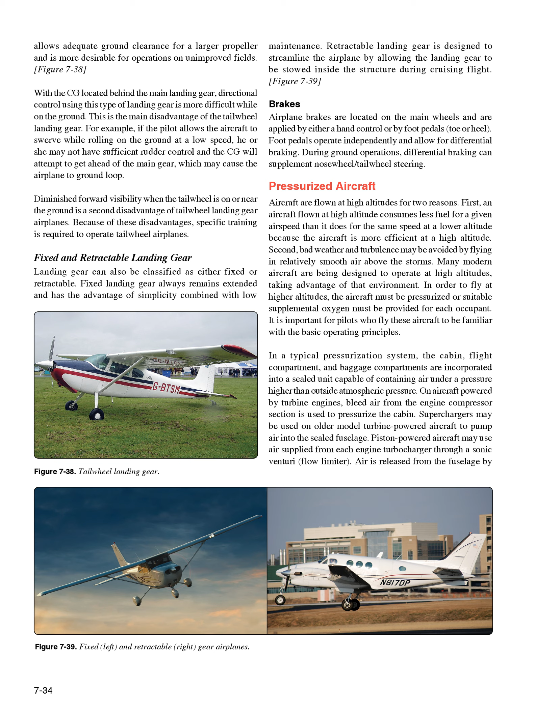Air is released from the fuselage by a device called an outflow valve. By regulating the air exit, the outflow valve allows for a constant inflow of air to the pressurized area. Figure 7-40: a cabin pressurization system typically maintains a cabin pressure altitude of approximately 8,000 feet at the maximum designed cruising altitude of an aircraft. This prevents rapid changes of cabin altitude that may be uncomfortable or cause injury to passengers and crew.

In addition, the pressurization system permits a reasonably fast exchange of air from the inside to the outside of the cabin. This is necessary to eliminate odors and to remove stale air. Figure 7-41: pressurization of the aircraft cabin is necessary in order to protect occupants against hypoxia.

Within a pressurized cabin, occupants can be transported comfortably and safely for long periods of time, particularly if the cabin altitude is maintained at 8,000 feet or below, where the use of oxygen equipment is not required. The flight crew in this type of aircraft must be aware of the danger of accidental loss of cabin pressure and be prepared to deal with such an emergency whenever it occurs.

The following terms will aid in understanding the operating principles of pressurization and air conditioning systems. Aircraft altitude: the actual height above sea level at which the aircraft is flying. Ambient temperature: the temperature in the area immediately surrounding the aircraft. Ambient pressure: the pressure in the area immediately surrounding the aircraft. Cabin altitude: cabin pressure in terms of equivalent altitude above sea level.

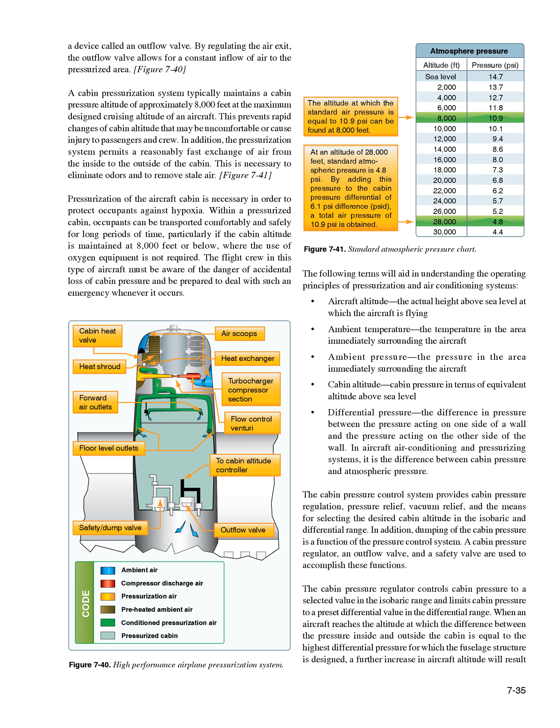Differential control is used to prevent the maximum differential pressure, for which the fuselage was designed, from being exceeded. This differential pressure is determined by the structural strength of the cabin, and often by the relationship of the cabin size to the probable areas of rupture, such as window areas and doors.

The cabin air pressure safety valve is a combination pressure relief, vacuum relief, and dump valve. The pressure relief valve prevents cabin pressure from exceeding a predetermined differential pressure above ambient pressure. The vacuum relief prevents ambient pressure from exceeding cabin pressure by allowing external air to enter the cabin when ambient pressure exceeds cabin pressure. The flight deck control switch actuates the dump valve. When this switch is positioned to ram, a solenoid valve opens, causing the valve to dump cabin air into the atmosphere.

The degree of pressurization and the operating altitude of the aircraft are limited by several critical design factors. Primarily, the fuselage is designed to withstand a particular maximum cabin differential pressure.

Several instruments are used in conjunction with the pressurization controller. The cabin differential pressure gauge indicates the difference between inside and outside pressure. This gauge should be monitored to assure that the cabin does not exceed the maximum allowable differential pressure. A cabin altimeter is also provided as a check on the performance of the system. In some cases, these two instruments are combined into one. A third instrument indicates the cabin rate of climb or descent. A cabin rate of climb instrument and a cabin altimeter are illustrated in Figure 7-42.

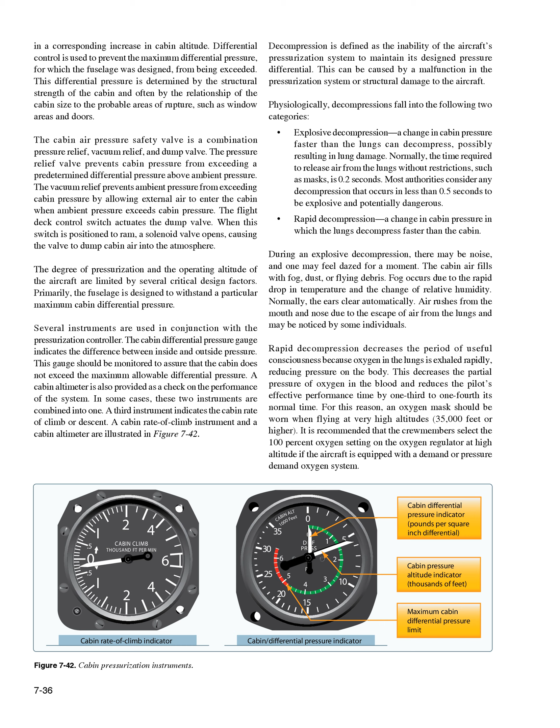The primary danger of decompression is hypoxia. Quick, proper utilization of oxygen equipment is necessary to avoid unconsciousness. Another potential danger that pilots, crew, and passengers face during high-altitude decompressions is evolved gas decompression sickness. This occurs when the pressure on the body drops sufficiently that nitrogen comes out of solution and forms bubbles inside the person, which can have adverse effects on some body tissues.

Decompression caused by structural damage to the aircraft presents another type of danger: pilots, crew, and passengers being tossed or blown out of the aircraft if located near openings. Individuals near openings should wear safety harnesses or seat belts at all times when the aircraft is pressurized and they are seated. Structural damage also has the potential to expose them to wind blasts and extremely cold temperatures. Rapid descent from altitude is necessary to minimize these problems. Automatic visual and aural warning systems are included in the equipment of all pressurized aircraft.

Oxygen systems: crew and passengers use oxygen systems, in conjunction with pressurization systems, to prevent hypoxia. Regulations require, at a minimum, that flight crews have and use supplemental oxygen after 30 minutes of exposure to cabin pressure altitudes between 12,500 and 14,000 feet. Use of supplemental oxygen is required immediately upon exposure to cabin pressure altitudes above 14,000 feet. Every aircraft occupant above 15,000 feet cabin pressure altitude must have supplemental oxygen.

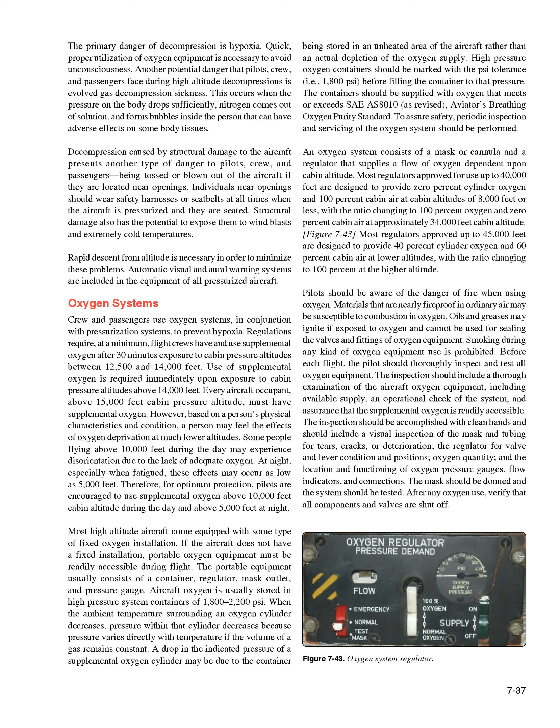Oxygen masks. There are numerous types and designs of oxygen masks in use. The most important factor in oxygen mask use is to ensure that the masks and oxygen system are compatible. Crew masks are fitted to the user's face with a minimum of leakage and usually contain a microphone.

Most masks are the oronasal type that covers only the mouth and nose. A passenger mask may be a simple, cup-shaped rubber molding sufficiently flexible to obviate individual fitting. It may have a simple elastic head strap, or the passenger may hold it to his or her face.

All oxygen masks should be kept clean to reduce the danger of infection and prolong the life of the mask. To clean the mask, wash it with a mild soap and water solution and rinse it with clear water.

If a microphone is installed, use a clean swab instead of running water to wipe off the soapy solution.

The mask should also be disinfected. A gauze pad that has been soaked in a water solution of merthiolate can be used to swab out the mask. This solution used should contain 1/5 teaspoon of merthiolate per quart of water. Wipe the mask with a clean cloth and air dry.

Cannula. A cannula is an ergonomic piece of plastic tubing that runs under the nose to administer oxygen to the user, Figure 7-44. Cannulas are typically more comfortable than masks, but may not provide an adequate flow of oxygen as reliably as masks when operating at higher altitudes.

Airplanes certified to older regulations had cannulas installed with an onboard oxygen system. However, current regulations require aircraft with oxygen systems installed and certified for operations above 18,000 feet to be equipped with oxygen masks instead of cannulas.

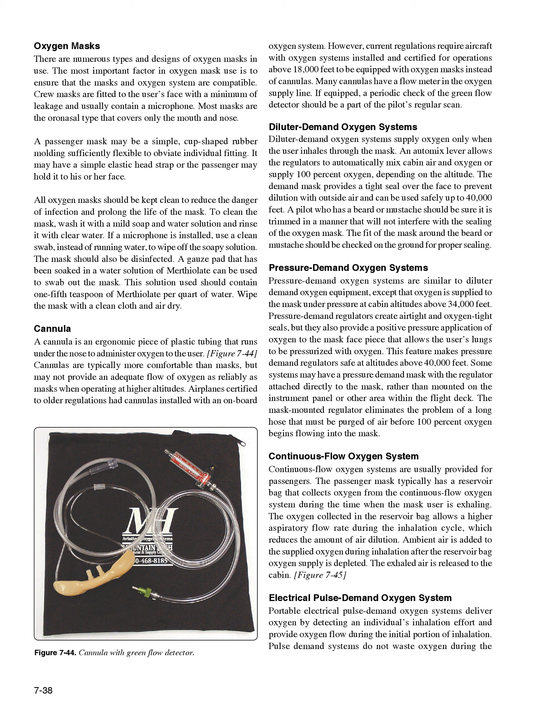Figure 745, electrical pulse demand oxygen system. Portable electrical pulse demand oxygen systems deliver oxygen by detecting an individual's inhalation effort and provide oxygen flow during the initial portion of inhalation. Pulse demand systems do not waste oxygen during the breathing cycle because oxygen is only delivered during inhalation.

Compared to continuous flow systems, the pulse demand method of oxygen delivery can reduce the amount of oxygen needed by 50 to 85%. Most pulse demand oxygen systems also incorporate an internal barometer that automatically compensates for changes in altitude by increasing the amount of oxygen delivered for each pulse as altitude increases.

Figure 746, pulse oximeters. A pulse oximeter is a device that measures the amount of oxygen in an individual's blood, in addition to heart rate. This non-invasive device measures the color changes that red blood cells undergo when they become saturated with oxygen, by transmitting a special light beam through a fingertip to evaluate the color of the red cells. A pulse oximeter can calculate the degree of oxygen saturation within 1% of directly measured blood oxygen.

Because of their portability and speed, pulse oximeters are very useful for pilots operating in non-pressurized aircraft above 12,500 feet, where supplemental oxygen is required. A pulse oximeter permits crew members and passengers of an aircraft to evaluate their actual need for supplemental oxygen.

Figure 747, servicing of oxygen systems. Before servicing any aircraft with oxygen, consult the specific aircraft service manual to determine the type of equipment required and procedures to be used. Certain precautions should be observed whenever aircraft oxygen systems are to be serviced.

Oxygen system servicing should be accomplished only when the aircraft is located outside of the hangars. Personal cleanliness and good housekeeping are imperative when working with oxygen. Oxygen under pressure creates spontaneous results when brought in contact with petroleum products. Service people should be certain to wash dirt, oil, and grease, including lip salves and hair oil, from their hands before working around oxygen equipment.

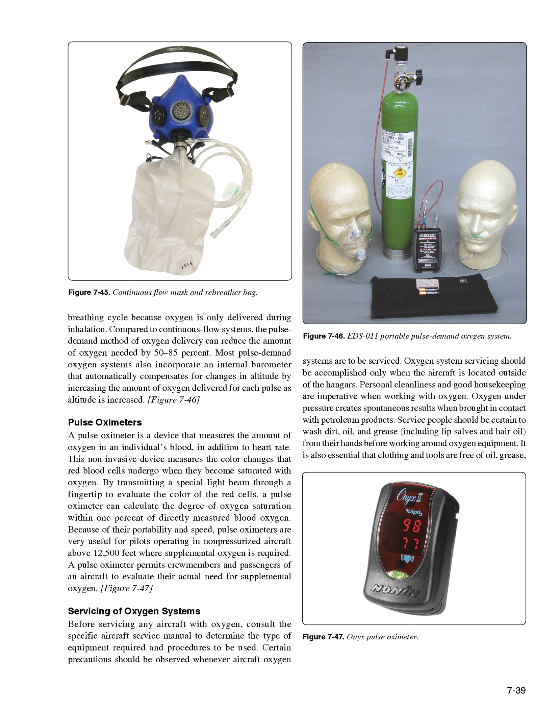It is also essential that clothing and tools are free of oil, grease, and dirt. Aircraft with permanently installed oxygen tanks usually require two persons to accomplish servicing of the system. One should be stationed at the service equipment control valves, and the other stationed where he or she can observe the aircraft system pressure gauges.

Oxygen system servicing is not recommended during aircraft fueling operations or while other work is performed that could provide a source of ignition. Oxygen system servicing while passengers are on board the aircraft is also not recommended.

Anti-ice and deicing systems. Anti-icing equipment is designed to prevent the formation of ice, while deicing equipment is designed to remove ice once it has formed. These systems protect the leading edge of wing and tail surfaces, pitot and static port openings, fuel tank vents, stall warning devices, windshields, and propeller blades. Ice detection lighting may also be installed on some aircraft to determine the extent of structural icing during night flights.

Most light aircraft have only a heated pitot tube and are not certified for flight in icing. These light aircraft have limited cross-country capability in cooler climates during late fall, winter, and early spring. Non-certificated aircraft must exit icing conditions immediately. Refer to the AFM/POH for details.

Airfoil anti-ice and deicing. Inflatable deicing boots consist of a rubber sheet bonded to the leading edge of the airfoil. When ice builds up on the leading edge, an engine-driven pneumatic pump inflates the rubber boots. Many turboprop aircraft divert engine bleed air to the wing to inflate the rubber boots. Upon inflation, the ice is cracked and should fall off the leading edge of the wing. Deicing boots are controlled from the flight deck by a switch and can be operated in a single cycle or allowed to cycle at automatic, timed intervals.

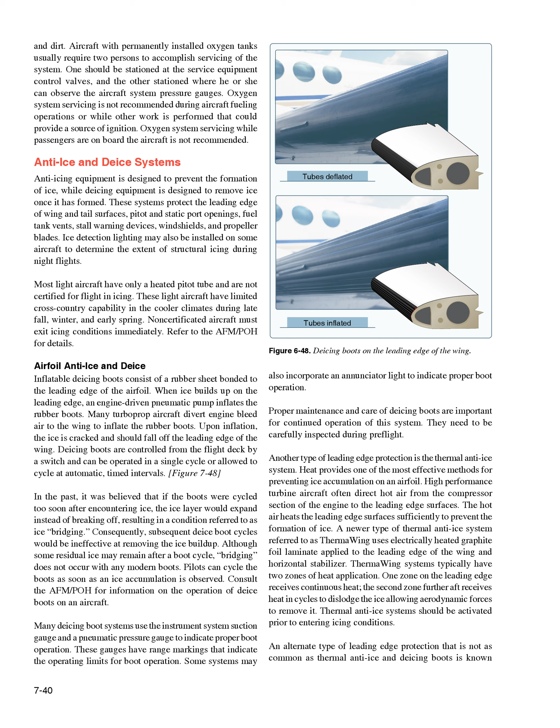An alternate type of leading-edge protection that is not as common as thermal anti-ice and deicing boots is known as a weeping wing. The weeping wing design uses small holes located in the leading edge of the wing to prevent the formation and buildup of ice. An antifreeze solution is pumped to the leading edge and weeps out through the holes.

Additionally, the weeping wing is capable of deicing an aircraft. When ice has accumulated on the leading edges, application of the antifreeze solution chemically breaks down the bond between the ice and airframe, allowing aerodynamic forces to remove the ice.

Figure 749, Windscreen anti-ice. There are 2 main types of windscreen anti-ice systems. The first system directs a flow of alcohol to the windscreen. If used early enough, the alcohol prevents ice from building up on the windscreen. The rate of alcohol flow can be controlled by a dial in the flight deck according to procedures recommended by the aircraft manufacturer.

Another effective method of anti-icing equipment is the electric heating method. Small wires or other conductive material is embedded in the windscreen. The heater can be turned on by a switch in the flight deck, causing an electrical current to be passed across the shield through the wires to provide sufficient heat to prevent the formation of ice on the windscreen.

The heated windscreen should only be used during flight. Do not leave it on during ground operations, as it can overheat and cause damage to the windscreen. Warning: the electrical current can cause compass deviation errors by as much as 40 degrees.

Propeller anti-ice: propellers are protected from icing by the use of alcohol or electrically heated elements. Some propellers are equipped with a discharge nozzle that is pointed toward the root of the blade. Alcohol is discharged from the nozzles, and centrifugal force drives the alcohol down the leading edge of the blade. The boots are also grooved to help direct the flow of alcohol. This prevents ice from forming on the leading edge of the propeller.

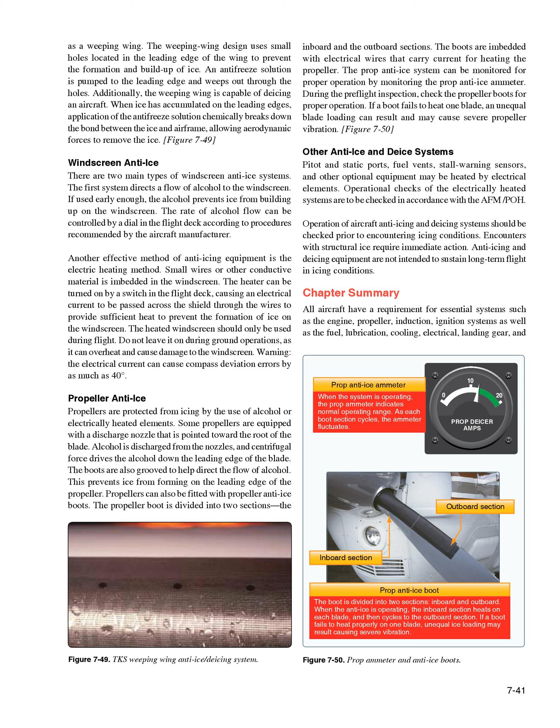Chapter Summary: All aircraft have a requirement for essential systems such as the engine, propeller, induction, ignition systems, as well as the fuel, lubrication, cooling, electrical, landing gear, and environmental control systems to support flight.

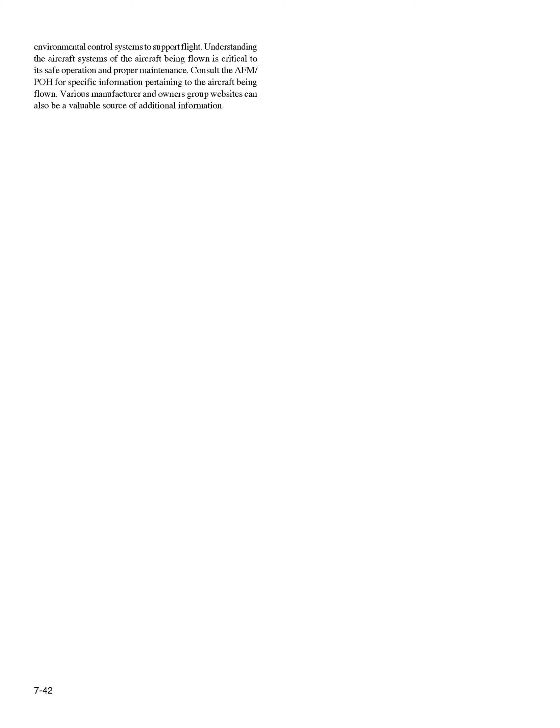Understanding the aircraft systems of the aircraft being flown is critical to its safe operation and proper maintenance. Consult the AFM/POH for specific information pertaining to the aircraft being flown. Various manufacturer and owners group websites can also be a valuable source of additional information.